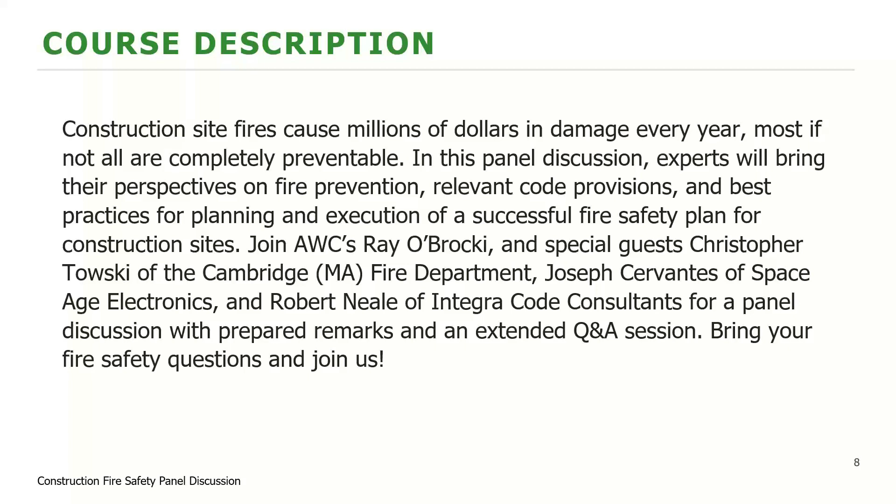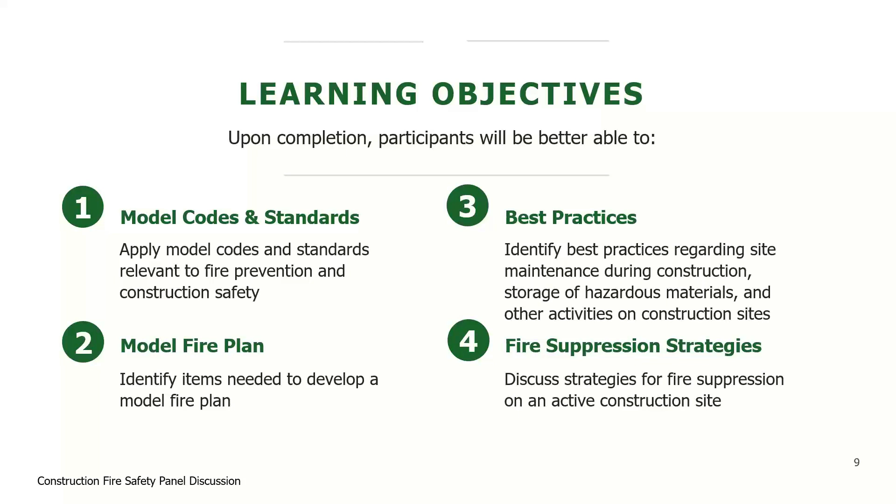Let's go over learning objectives before we get into introductions. We're going to talk about some model codes and standards relevant to fire prevention and construction fire safety. We're going to talk about a model fire plan, which is required for construction sites. We're going to identify some best practices regarding site maintenance during construction, storage of hazardous materials and other activities on construction sites. And then we're going to discuss strategies for fire suppression on active sites.

Okay, so that's me. Before I became the manager of fire service relations with the American Wood Council, I did 23 years in the Baltimore City Fire Department. I was the fire marshal, fire official. And then I retired and became the chief building official for a little city outside of DC named Rockville, Maryland. It's where the Consumer Product Safety Commission is housed, among other things.

Now I am the manager of fire service relations for the American Wood Council and the administrator of the Construction Fire Safety Coalition. All the panelists today are members of the Construction Fire Safety Coalition. If you're interested, we have a lot of resources on our website, which is constructionfiresafety.org. You just Google construction fire safety, and that'll be one of your first things to come up.

So let me introduce our panelists today. First up will be Chris Towski. He's a fire lieutenant for the city of Cambridge, Massachusetts, with over 24 years of service. He spent over 12 years with the Fire Prevention Office, where the primary duties were to enforce state laws and codes related to fire prevention and protection.

I think what makes Chris particularly qualified for this panel discussion is he's a master electrician. He's a licensed electrician and construction supervisor in Massachusetts. He has been his department's electrical safety officer for almost 12 years. I think that's important because if you look at the Campbell report that came out in February 2020, while electrical wasn't the number one cause of fires, that and arson amounted to the biggest fire losses. 75% of all the fire losses were in fires that started either with electrical or with arson. He's been the department's electrical safety officer for 12 years, and he instructs on various electrical safety topics.

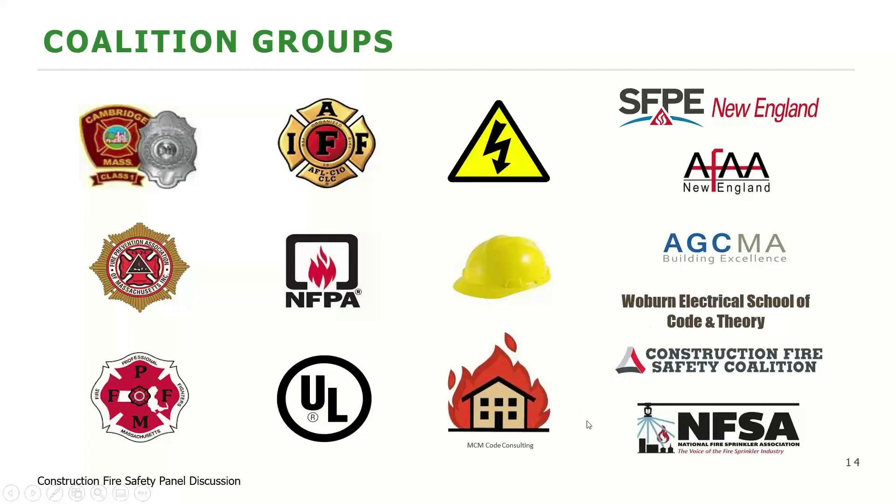You saw the big laundry list that I had. I put a lot of time and effort into trying to master what I do out there, and this is one of the arenas that is very personal to me.

And with construction fire safety, the reason is what you see here with that hard hat is I come from a construction background. Prior to me getting into the fire service, I had 10 years doing things like banging nails, and then I got more specific into the electrical trade. And then I brought that with me here in the fire service.

And with my promotion, it allowed me to do some things with all my tenure in the fire prevention regulatory side of it. It allowed me to really focus in on this.

As Ray had mentioned, I'm affiliated with the NFPA. I sit on many committees, with 241 being one of my strongest. When I first got in that committee under the NFPA requirements, I was under the enforcer, but now I'm representing the International Association of Firefighters, that's labor-based. So I'm representing labor, but there's still a big portion representing the enforcers because the enforcers out there are doing the labor. And as Ray mentioned, I'm the current president of the Fire Prevention Association of Massachusetts.

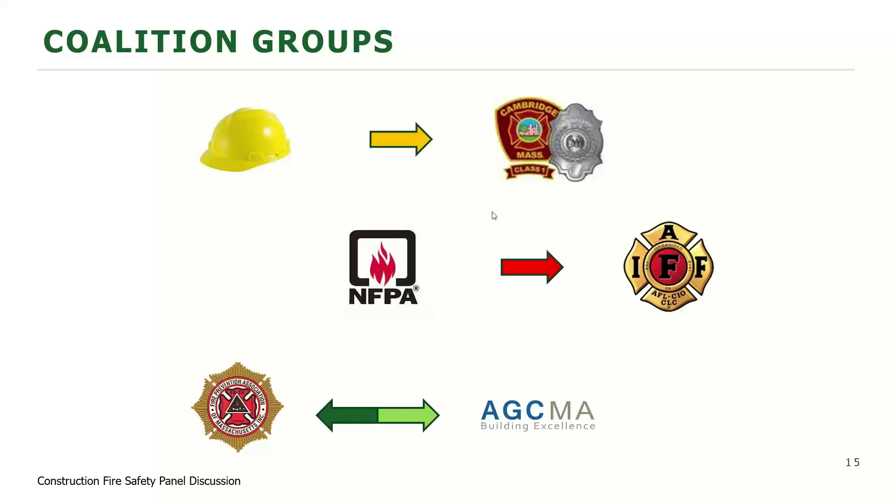What we did several years ago here in Massachusetts is we made a marriage. Essentially, we became a member of the Associated General Contractors of Massachusetts because they're a big organization, and we took them on as a member of us. That's where we can really bridge the gaps, if you will. We've had very good success over the last 6 years here in Mass with what we've done with partnerships throughout the Commonwealth and spreading the word.

Typically, when I do this presentation, I throw this out to everybody. From the polling question, there's quite a few folks here, whether you're an AHJ out there, a building or fire official, or if you're a contractor in that realm, or a consultant - I saw there was a good portion. So everybody is going to get something out of this, no matter where you sit. But the bottom line is it doesn't matter what your role is - you have to be involved and you have to have some layer of responsibility to it.

So again, high level here, just showing you the United States problem, if you will. It's estimated that there's just right around 8,600 construction site fires here in the United States. Granted, a lot of them are on the smaller scale - we obviously see the things that hit the news lines. I do my own personal tracking daily, and I'll show you what I hit on. But the bottom line is it costs a whole lot of money, and it injures a whole bunch of people. The averages out to be about 23, 24 a day out there.

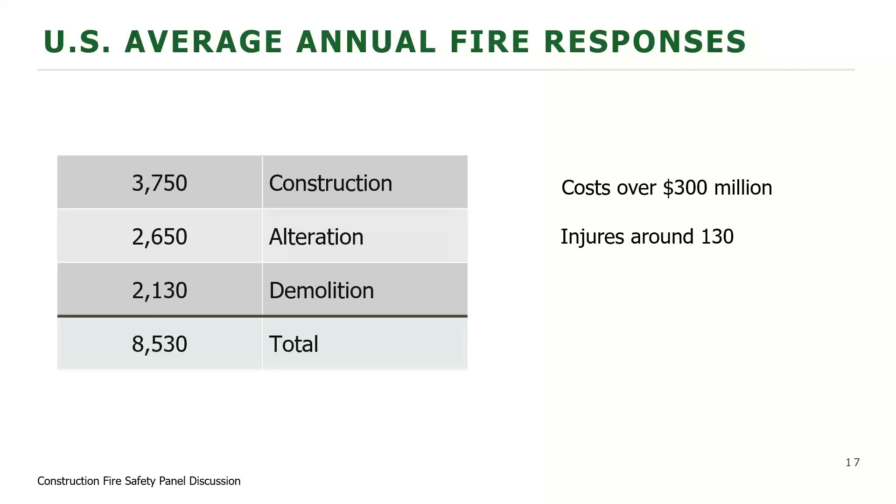What I see more of is that we're about on track for every 3 to 7 days - sometimes we'll have a wide stint, we might go 10 days - where we're seeing something that hits the news lines. Unfortunately, what happens is we get a lot of shadowing. What I mean by that is we get our seasons where we have a lot of wildfires, so trying to do a search on fire, a lot of things get focused and the focal point all goes to the wildfires, and whatever might be taking place construction-wise gets a backseat if it's showing up at all. But what you're seeing here is the tracking I've been doing over the last 5 years. We're the 14th day into the new year, and we already had our first one in Las Vegas just a few days ago.

But what I want to bring to your attention, without boring you too much, is look at last year alone - last year, we had 89 construction site fires. I actually think this might be off a little bit, but we'll leave it at that number for the time being. So we encroached pretty much where we were for 2018 - I actually think we exceeded it. But you can see we had more fatalities, and this is going global too, not just the United States - this is going worldwide. And we've had a bunch of injuries.

What's key here, especially here in the United States, we had several months of closing down of construction sites. Even with that closing down period, we were still able to maintain those numbers high. So we got to really look at this holistically and say we have a problem. Granted, construction site fires are small on the whole fires problem out there, but it's still a problem, and the problem's growing. So we really have to put more focal point into it. Joseph's going to go over the causes and stuff that are more popular out there.

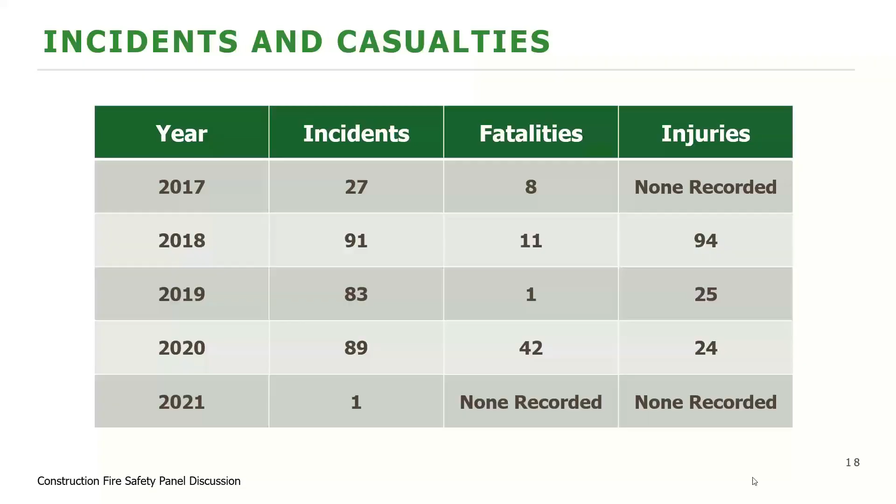But wood is not the enemy, and I know this is specific for the Wood Council, so I'm sure they like the feather in the cap there, but we got to really look at this. Wood's not the enemy, it's just something that we have to live with, something we construct that we use. And if we look at the reality side of it, wood is needed because it keeps us in a much greener place with what we got going on in our environment out there.

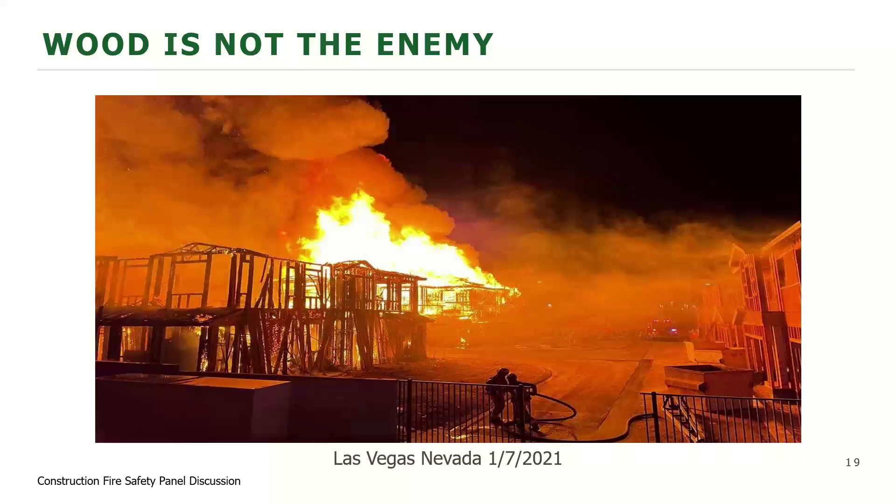So, like I was saying, we live in a world where things burn. It's our job to figure out what we're going to do to break the fire triangle. When we look at the fire triangle, the theory is real simple. There's 3 elements: we have the oxygen piece, we have the heat source, and we have something that's going to burn. We can't control the oxygen part, but we can do a much better job separating out the heat sources and the fuel. It all comes down to housekeeping and management.

So we kind of have 2 parts of what we really need to involve with fire safety. Yeah, we all want to look at this, prevent fires from starting in the first place. That goes a long way, but some of it we can't do. I know myself, I'm in the Northeast here, 4 to 5 months out of the year we're dependent on heat to stay warm and to keep things drying timely for the construction piece to it.

So it's nice to be able to have the magic wand to wave and say, let's put all our enforcers out in the streets, and we're going to cite people or whatever the action is going to take, we're going to stop this altogether. But the reality is that there's still going to be some underlying things in our world that make up what happens. And the bottom line is any fires that start, we just have to get involved with how to keep them from getting bigger. Whether it's earlier detection, earlier notification, changing our mindset of products, our scheduling, whatever the case is. And even our interactions, training our workforce out there how to recognize things and not just hang fire extinguishers on the wall, but give them the training and the things they need so they know how to use them. So how do we go about doing that?

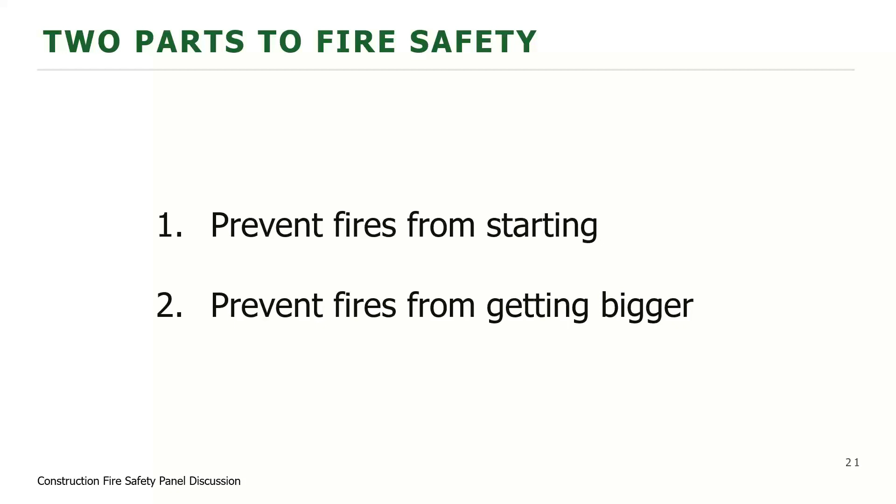This is what this is all about, this is our NFPA 241. This is the most current edition, the 2019. We're in the process of working on the 2022. We went from a 5 and a 6 year cycle, we're getting into the 3 year cycle. That's how the NFPA wants to do just about all their documents, which isn't a bad thing because it's able to be more blended into if folks are using NFPA 1 like we do up here in Massachusetts, that's on a 3 year cycle and what have you. So it seems to get into a place where it'll flow better, so the most current edition can be adopted into that cycling swing.

In Massachusetts, we're a cycle behind. We're using 2013 currently. We actually have a little conflict even within our own codes up here. We run a building code and a fire code, and both, our building code actually references the 2009 edition of 241, where the fire code references 2013. But nonetheless, the way we worked it out up here through our statewide fire partnership is the fire side wins, if you want to call it that, and the 2013 is the one to follow.

So we got four pretty essential steps here. Finding the code. Now, seeing most of the people out here, the big majority were the consultants and the AHJs, we know about that, so finding the codes isn't a problem for us, but it's going to be our job to make sure the rest of the world out there is able to find the code.

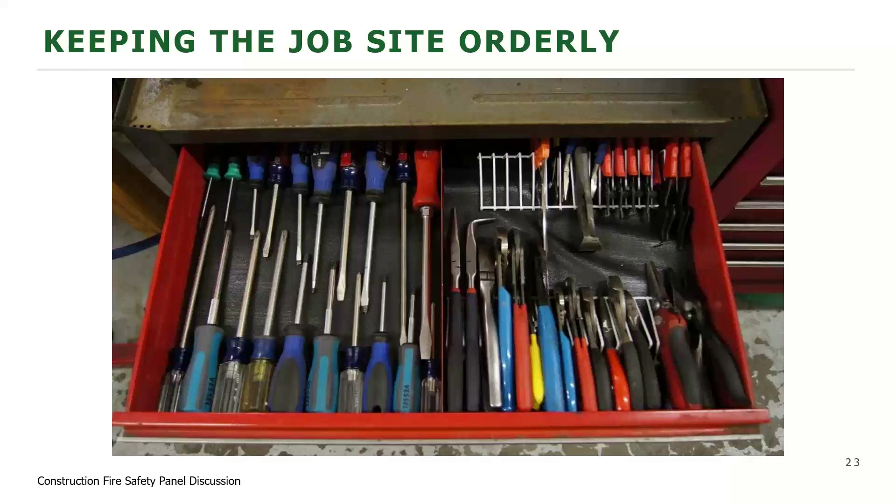Marcy put in a nice little flavor here in the heading. I had it worded a little bit differently, but I like what she put here, because it goes hand in hand. My view was this is what code is for the folks that are the AHJs and the consultants. And if you're in the code development process or the code writing piece, you get this. This is what code is intended to do. It's supposed to be nice, neat, and organized. And like Marcy put out there, just like the job site, it's intended to be nice, neat, and organized.

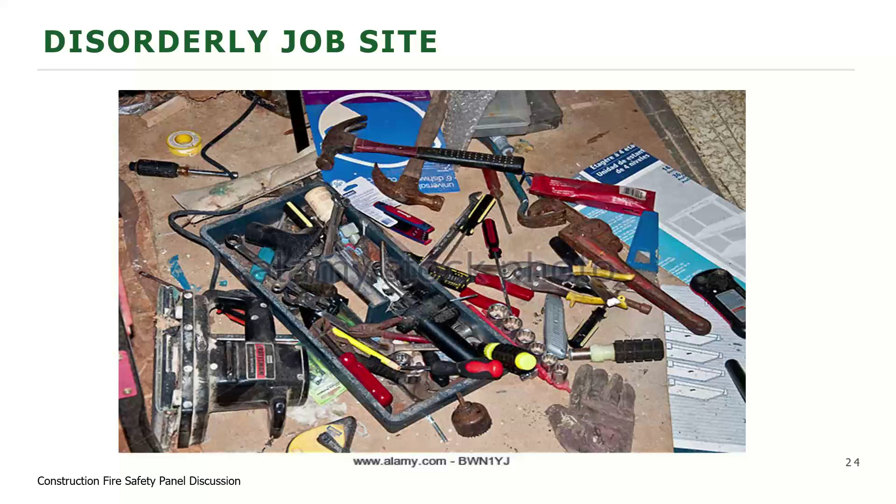Advance, please. So who does the code apply to? This is the key. When you get into NFPA 241, the current edition, which is kind of funky—I'll get into where we're going with the next edition at the end of this—it's kind of funky. You've got to go to the middle of the document to even figure out who it applies to.

But the street name is, it's an owner's document. Just like most things that get built, the owner is always on the hook for things. But this here, it's the owner's document, plain and simple. The owner has some rights, obligation, whatever you want to call it, where they can delegate out that authority.

And that happens pretty widespread, especially since I'm in an urban area outside of the Boston area. So the bulk of the construction, outside of the mom and pop shops doing single family or flipping of property, that stuff—but the ones taking the ground-ups and the high rises and the multifaceted, multi-tenant, multi-use groups and the real complicated pieces, these things are all getting delegated out, as you know.

And typically they'll fall into the platter of the construction manager, which is under the umbrella of the general contractor. There is a big swing though, because even contractors are realizing this might not be an arena they could have a whole lot of input in for developing. They can hopefully implement it, but the development piece, so they'll shift that off to a consulting firm.

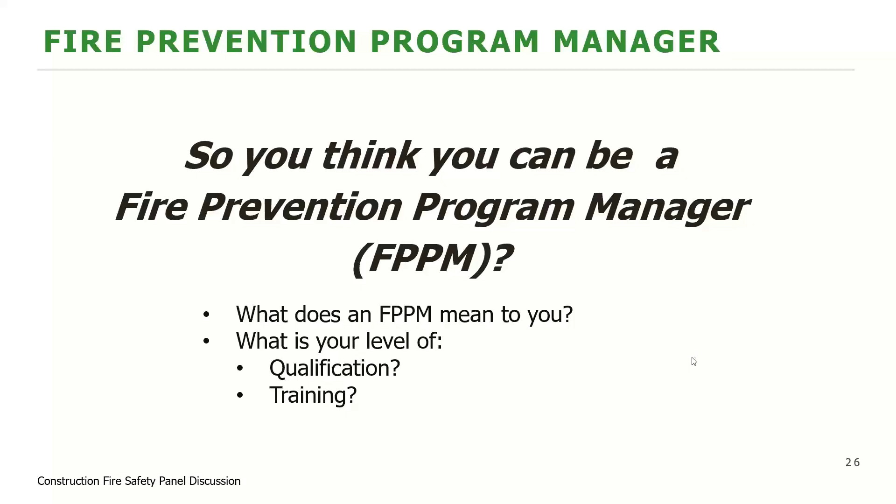Advance, please. Thank you. All right, so I try to break it down, and again, I'm trying to keep this light, if you will.

You have to recognize and pay attention to those needs for prevention. And again, prevention could have two meanings: preventing fires from happening from the beginning, or preventing them from getting bigger. So you have to know where you sit with that.

You have to be part of the program. I knew I'd get a chuckle out of somebody somewhere. But you have to be part of the program.

Get involved. Yes, plans are being sent to you and you've read them. But if you're in that development process of developing that program, you'll comprehend it much more, and it'll be a much easier rollout when you have what we call in the fire service the tailgate talks, or what happens in construction - your morning safety chats or whatever it is - and you can roll it out that much more streamlined. And you have to be a boss.

I get it, especially - I'm imagining it's like this all over the country and the world - but here in the Northeast, we're having a construction personnel shortage. Most people that are educating themselves aren't getting into the construction piece. The numbers are much smaller. We're having difficulty filling the specialty trades like electricians and plumbers, but there's still a lot of folks in there - the numbers just aren't as high as we'd like, especially with the amount of work going on.

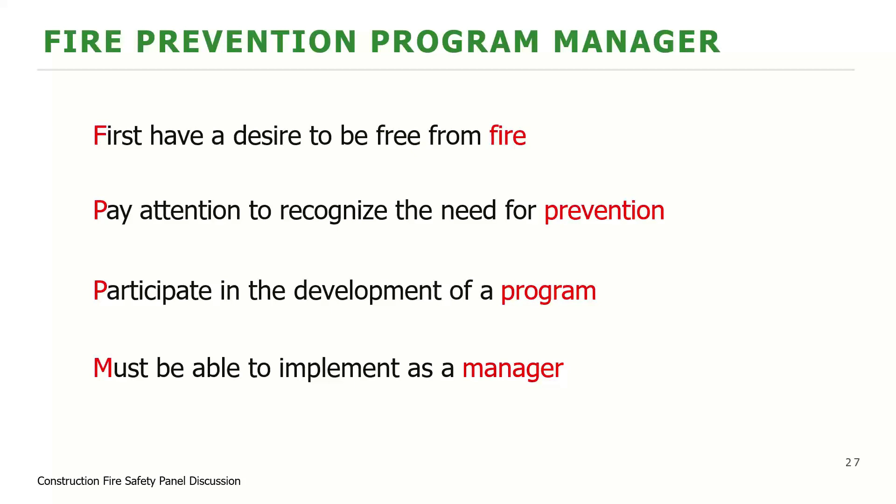Advance, please. All right, the plan - again, as I mentioned, Mr. Neal is going to give you a wonderful presentation and touch on planning and stuff. But again, another play on words.

This here I left in for myself - we're at a point, especially up here with our 6th year of really implementing that in the Northeast, and certainly out of the Boston area, and through my own eyes, the fire service view - we're being handed multi-pages of plans, which is great.

That all needs to be submitted, maybe as part of the building permit process, the way we walk that dog up this way. But as far as knowing what it transpires into from the enforcer side, I know what the words mean, I know what 241 means, I know what that section means.

What I'm looking for now is the punchline, the 1-2 page high level timeline. I'm not looking for every day what's going to happen. I'm looking for significant changes, what's going to happen.

If we can put it together and lay it out in a nice chronological order, I'm finding, me personally, that the spreadsheet format is working. It can pull things out in color coding across different time periods and activities, where personnel are going to be and what the activity is going to be. You can hone in on where your hot work processes are or where your heat sources are. So there's many ways to do that.

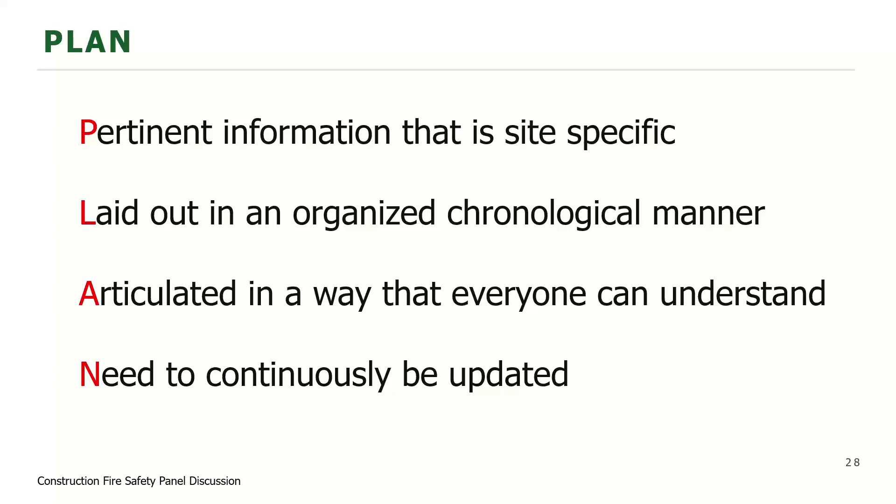So implementation all points back to that. It has to be flexible, modular, and expandable.

This is probably the most difficult part, and good luck to Rob on this, on how he's able to portray words on a paper that have life, because it is a living document. Just like that analogy I just gave of the baby, from the time it's born to the time it's an adult, of all the things it has to go through.

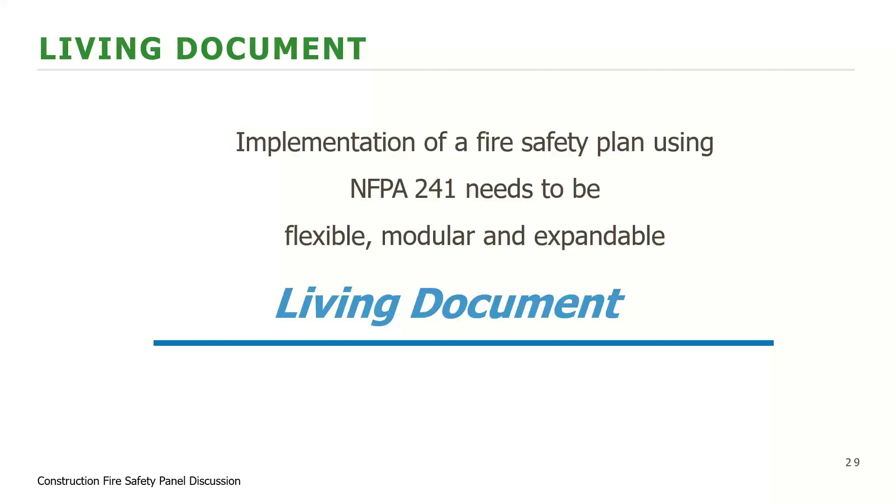All right, so fire service enforcement. Let's see now, we'll start poking the ribs of some of our enforcers out there, especially if you're on the fire service side.

241 makes it kind of very clear. The only thing that should be asked of the fire service is just consulting. In other words, just to get an insight, a bird's eye view, if you will, of how that fire service must operate, to see what their specific needs might be.

I'm starting to spread the message now, as we grow together up here in the Boston area. I'm asking these ownerships, developers and contractors now, how many of you have ever gone to your local fire service and said, hey, if I'm going to build something, let's say it's all wood construction, and I'm out in this remote area, do you really have enough resources? Do you have enough water supply to mitigate, to do anything, should there be a fire?

No one's asking those questions. We're still in the infantile baby step role where, hey, I'm just glad people are starting to get some plans out there, because at least now they're starting to pay attention to this. But we still got a long way to go, so that as we domino this, as we spread this, we'll get folks in tune on walking in the fire service shoes, so they'll get a good side of that. And that's how we do that on the fire service side, we're making our expectations known.

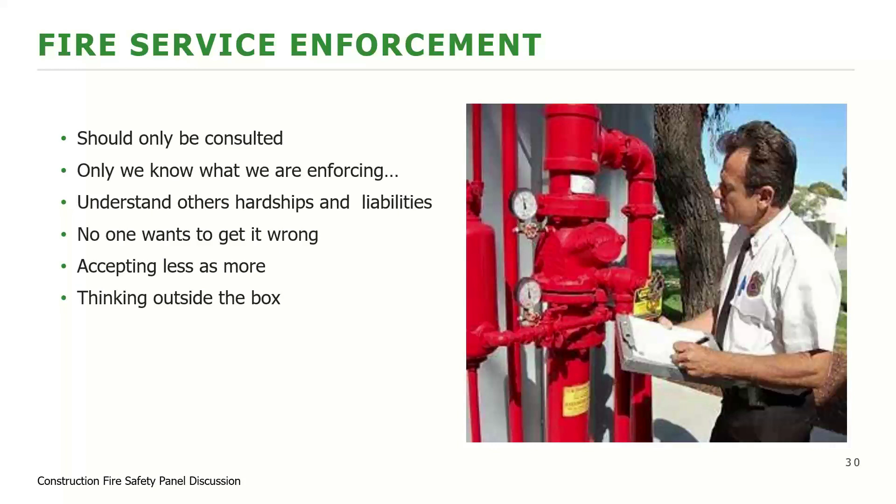So with that, the next edition piece—we're into this huge reorganization of it. We've moved some chapters around, took some things that were in two different places and combined them. We really cleared it up. We defined what FPPM means, and we spent a lot of time on sprinklers.

I won't bore you, but you can look at what we've done through the tier review with the NFPA for the next edition, or you can wait till the 2022 comes out. We've added a chapter for large wood, which is key for why we're having this discussion today, and we put a lot of emphasis onto the program, especially with the sprinklers.

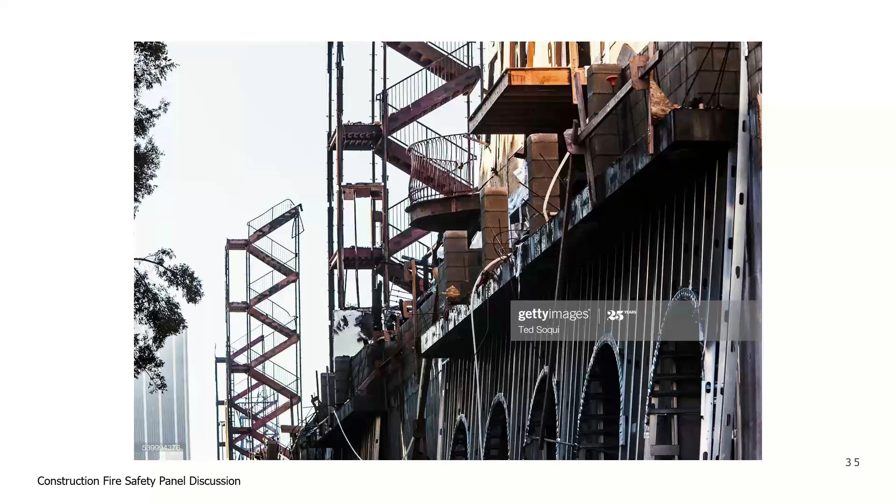This is an image of the Da Vinci apartments in downtown Los Angeles. This happened in 2014—that's the outer shell left after a massive collapse right in the heart of downtown LA. So why are fire risks increased on construction sites, and what standard can we use to help move forward?

The standard for safeguarding construction, alterations, and demolition—NFPA 241—as Lieutenant Towski hit on. NFPA 241 has a technical committee, and that committee went through and did a review of the annual averages of fires that had happened between the years 2013 and 2017.

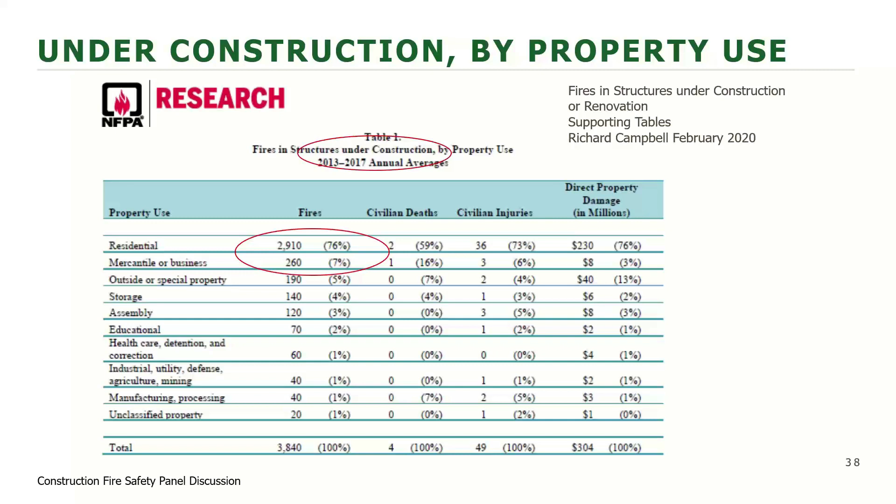In that report, they showed that residential fires were the superseding leading cause in construction fires for projects under construction, at 2,910 incidents. They broke down those incidents, and this is where we get into specific fire protection. If we're talking to NFSA or to contractors, they're asking, well, where are the areas in a building I have to focus on? What I really wanted to point out here is the element of what causes these situations.

Cooking equipment, electrical distribution and lighting equipment, heating equipment, and then intentionally set fires—those are the most precedent causes. And then everything below that, you can see where we have regulation in place: hot work, fire watch after hot work, spontaneous combustion. Those levels are so much lower because there is so much regulation and oversight on them. But look at all of the human element.

It fits in kind of nicely with what Lieutenant Towski had mentioned, which is the human introduction of accelerants, cooking equipment. They're still cooking on construction sites. There's still issues with electrical distribution, temporary lighting. We got these massive panels going in, temp lighting panels. There's no protection. These are structures standing for 2+ years without water protection. And that's a serious issue, especially when we're talking type 3, 4, and 5 construction.

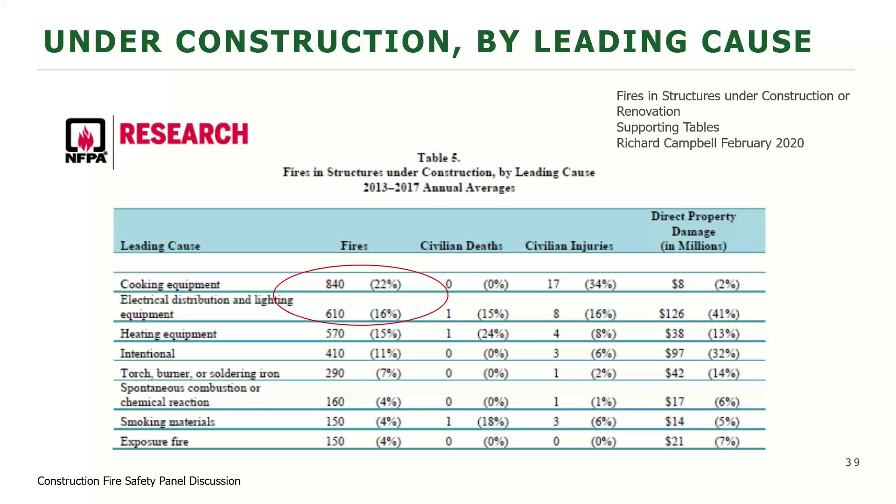So we can really focus and harness our attention on these specific locations to make sure that when we're putting fire protection methods in place, we can allocate it to the right area to slow down the progression of the fire. We may not be able to stop them, but we can slow them down a little bit with water or proactive alerting detection. So we can move forward.

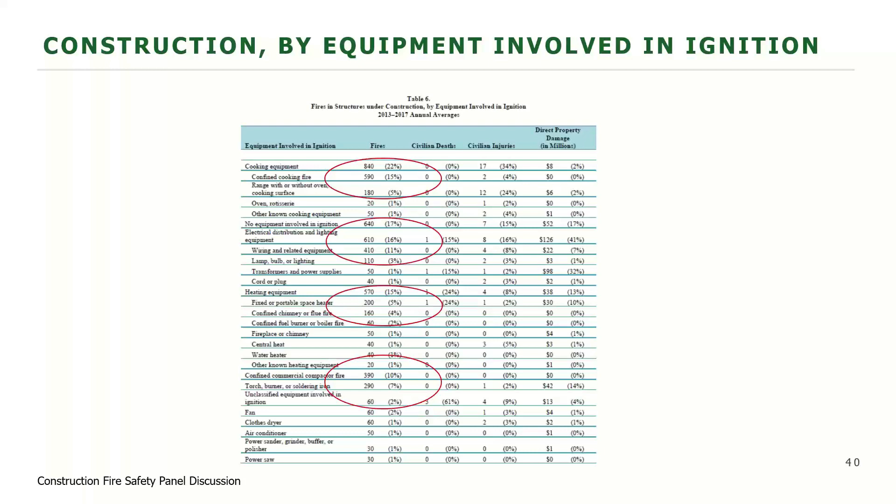The elements are broken down even further as you continue into the report. I ask you, code officials, everybody on this call, please look for NFPA 241, the report that came out. This was in February, and it's just a great report to look at, really isolating where these locations are.

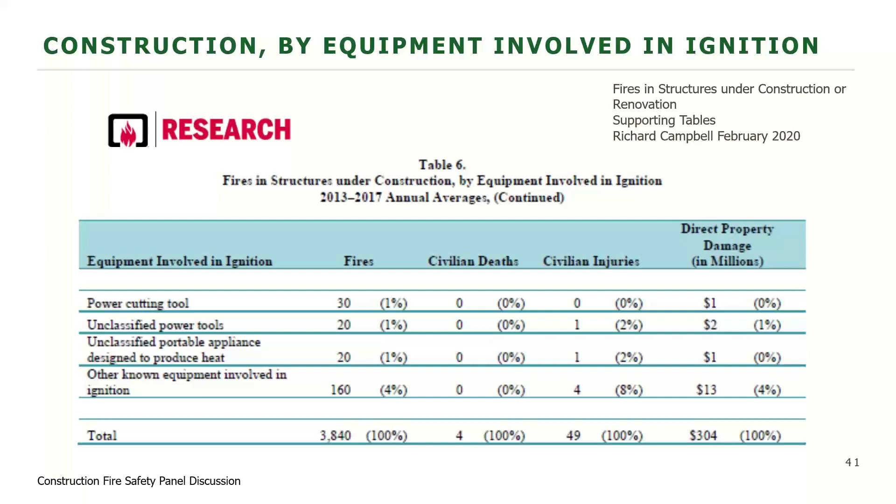You can move forward. Again, it continues to go down into the human element of power cutting tools and the different things that are starting the fires on the lower end. But you can see the averages there of just new construction, with 3,840 fires per year as an average over those 5 years.

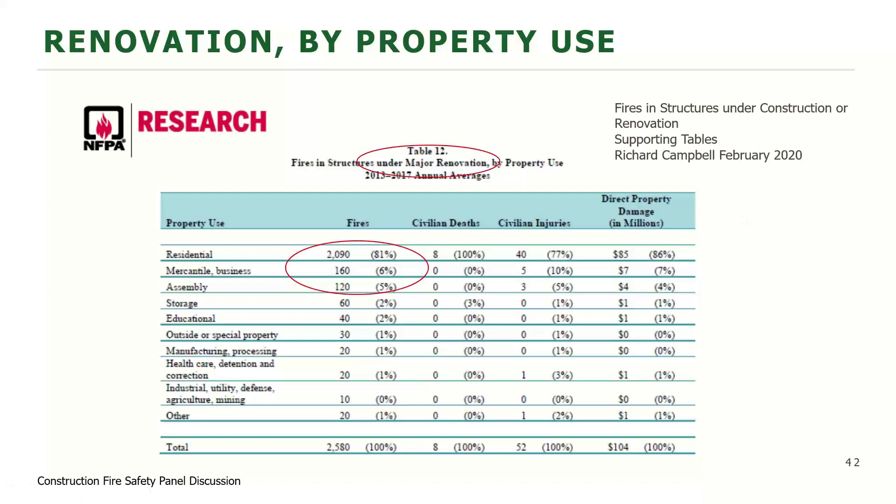Go forward. In major renovations, the leading cause in those was residential as well. I mean, that's a really big number. What does that tell you now? We have to dig into that.

The causes change. Now we're using existing infrastructure, existing house panels or existing lighting panels or what have you to power the construction area, or maybe we're demoing certain areas and they're not safed off properly. But you can see again, it's the electrical distribution, it's the existing systems in the building, the heating equipment. People are trying to stay warm in a non-tenable space. As Lieutenant Towski mentioned, on the East Coast you deal with that every day. It's cold and you've got to stay warm, and there's accidents that happen.

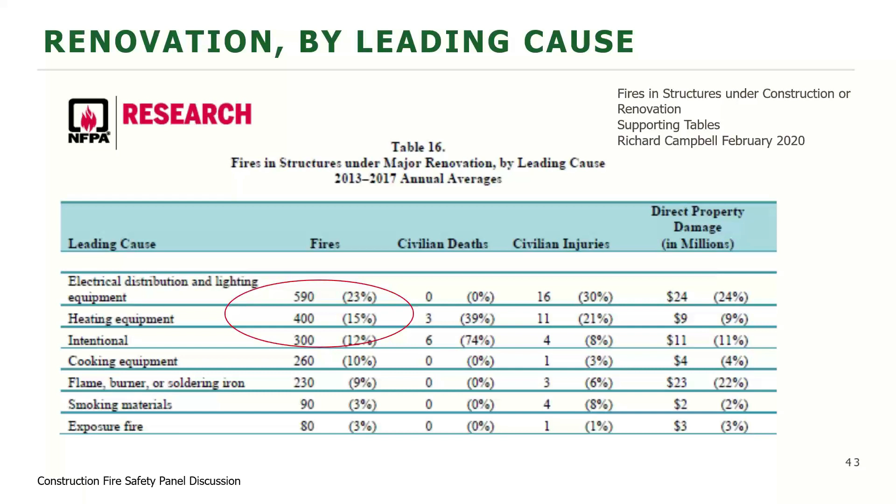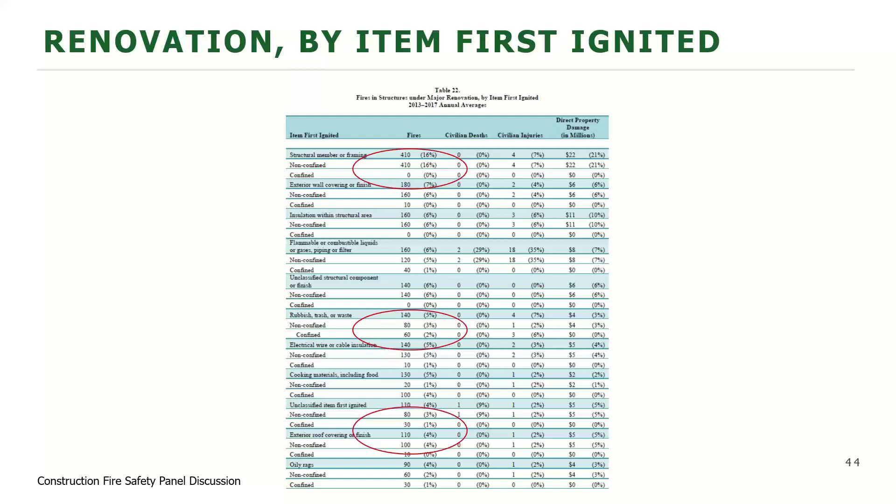And then the intentionally set fires rounds it out. But you can see again, it's a very big distribution from the human element. And then it gets even further down into where those are happening when we're talking about structural members, or the rubbish and trash waste. I'll point out an instance here in Virginia that happened recently where a fire chief said it was a trash chute that actually started the incident. And again, it's combustible material accumulation.

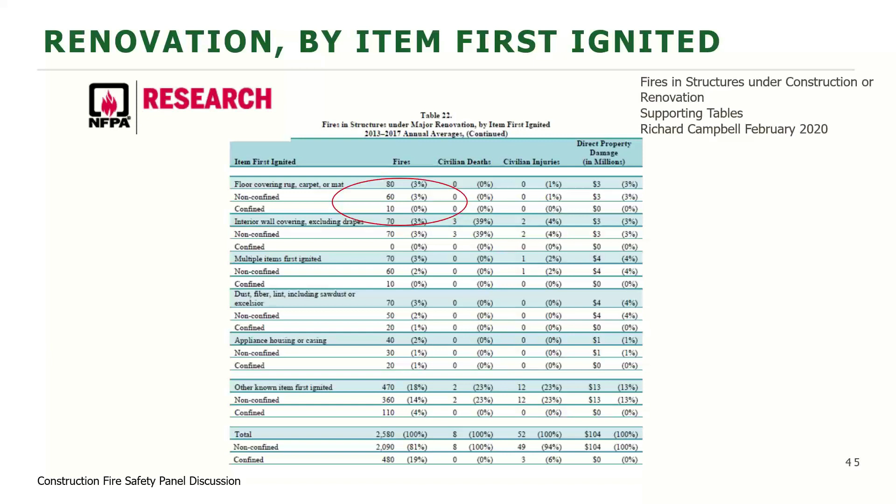So we talk the three-legged stool of firefighting: it's fire department access, water supply, and early notification. And so as far as firefighter access, fire department access, I'm going to hit on a couple of slides of that.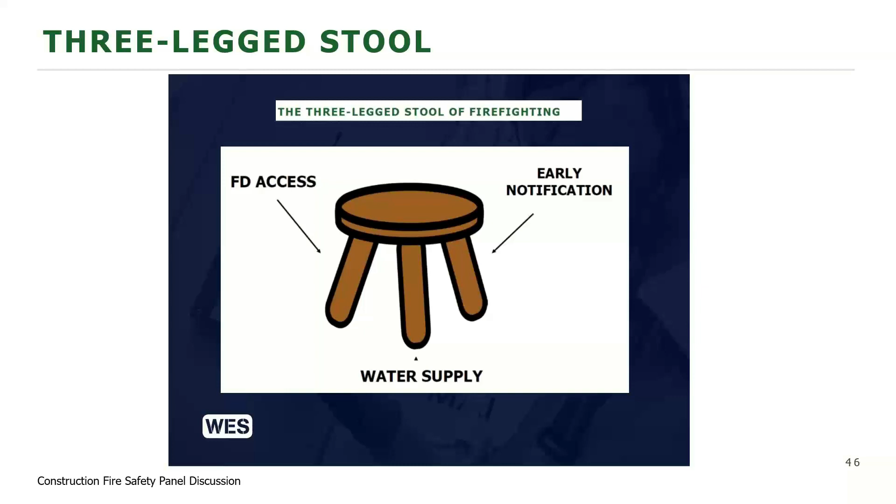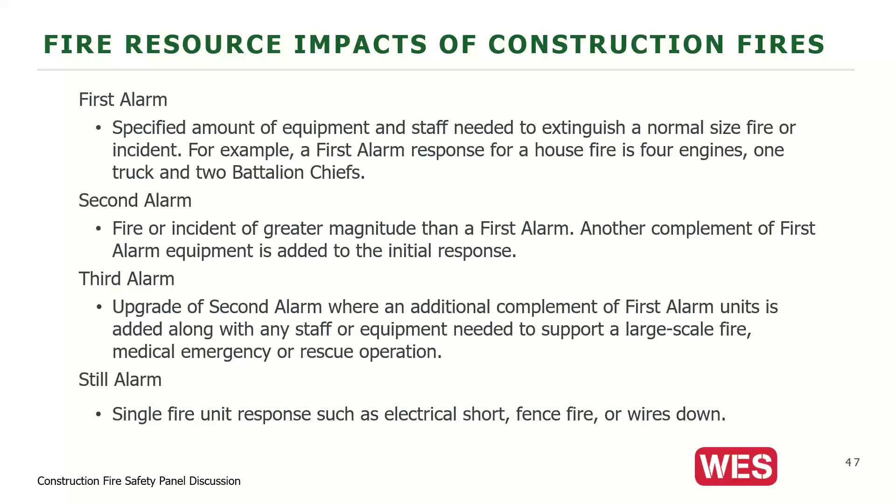Move forward. So the resource impacts on construction fires, and I'm preaching to the choir here: first alarm, second alarm, third alarm. For those of you that don't understand the resource loads this places on the strain, think of your local communities. You have a local firehouse that can report to anything in a certain area, and if the situation's a little more than they're capable of, they call in additional resources, backup. And you see it on TV shows today, call in for backup.

Well, when you start getting these major construction fires, you start moving the escalation up to where it's fifth alarm, sixth alarm, seventh alarm, outside of this scale that I was able to show you here that I found in the public domain. And look at the amount of equipment and resources that this takes: 6 battalion chiefs, rescue squad, division chiefs. This is the impact on your local community.

Because I know where I live, I go out on the streets and I can see construction sites everywhere with wood frame construction. And if a situation happened like this in the middle of my city, the resource allocations this is going to put on Southern California are tremendous. And we have fires out here regularly, and I see our firefighters out there on the hillsides combating some of these wildfires that we're dealing with right now because of all the Santa Ana winds.

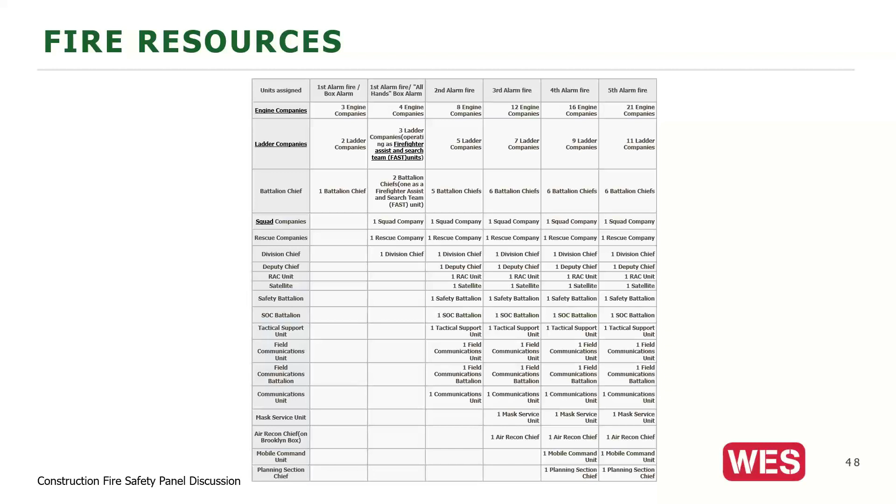So now you add the element of a situation like this with all of the different things that are happening socially out there with arsons and things that are coming at us. It creates situations like this.

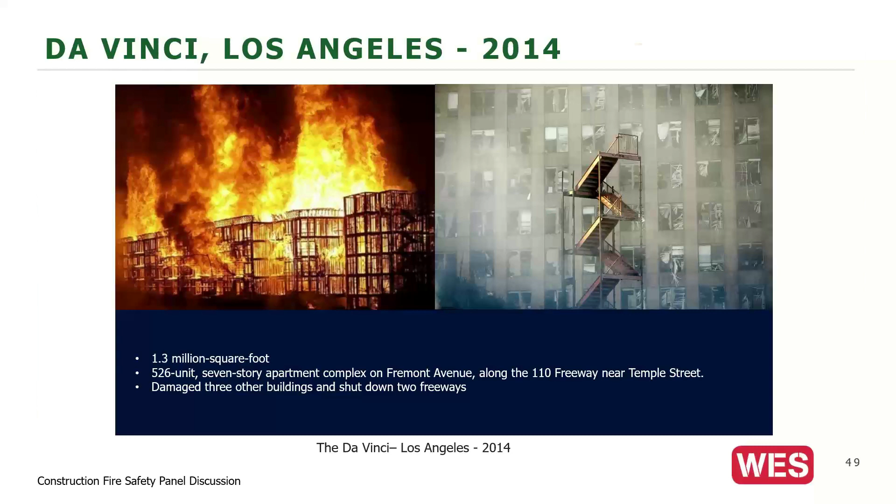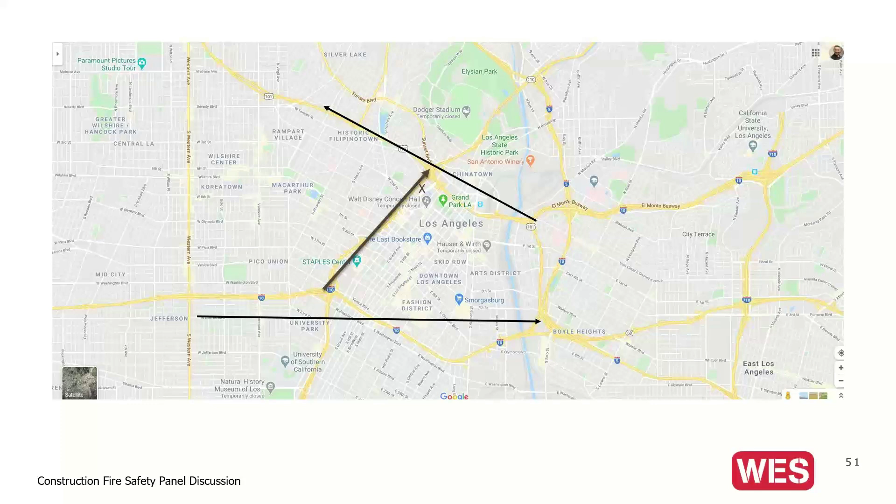This incident, because it happened in the middle of Los Angeles, if you understand the grid pattern of our freeway systems, in the center of that image right there where it says Los Angeles, that's downtown LA. And the way our freeways run, the 10 runs east and west, the 101 runs to the northwest, and then you have the 110 that intersects. The 110 gets you home right through downtown. This happened right there in the X. That is just adjacent to the heart of the city of Los Angeles.

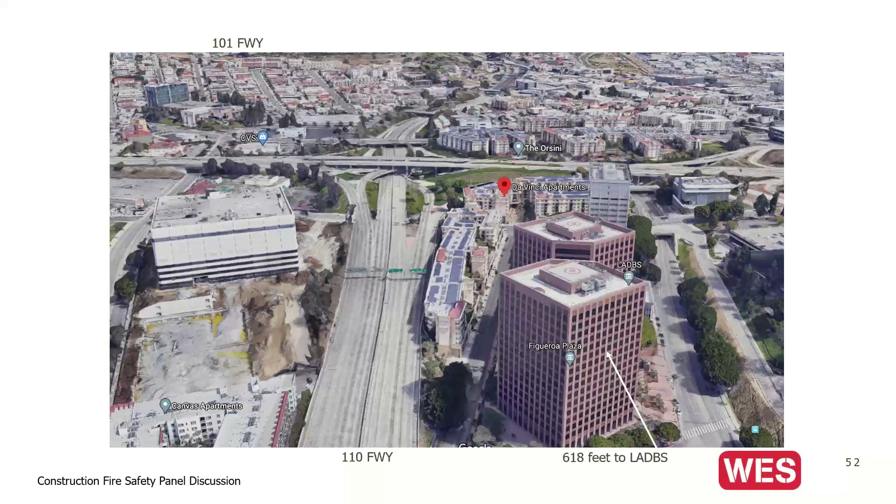There you can see the final image on Google Images. You can see how close the Department of Building and Safety was to this structure. There's the aftermath. It was a complete collapse.

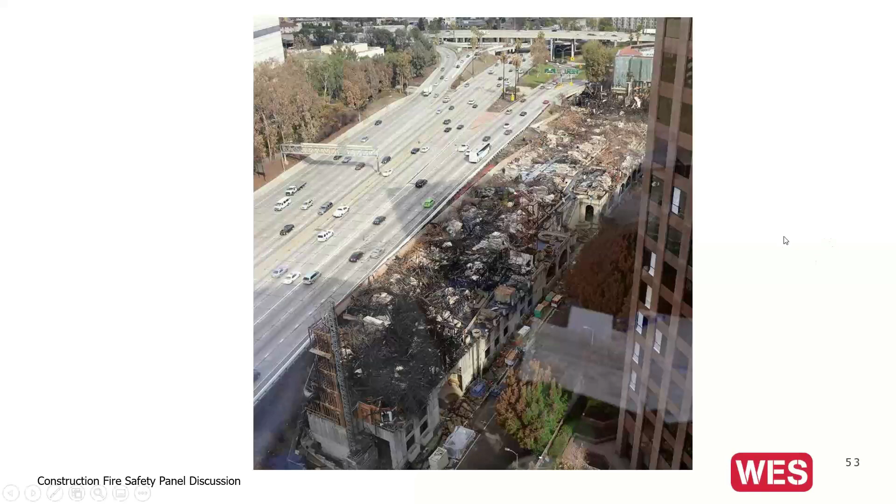There was an issue with fire department access. There's video available in public domain where you can see apparatus that had to be moved around regularly because they ran out of water and had a hard time getting that water source to the structure as it continued to burn. Remember, this is a full-size building.

I believe it was, as many stories as it was, had zero water protection in it. The fire load calculations, when we talk about ample water supply for a construction site, is based on, I believe now in the new code, 500 gallons per minute. But if you think about this, do a water calc load with a full-size sprinkler system with additional water storage on site, and now do that for a 7 story building that has zero water protection. We're running out of water, and that's a big issue.

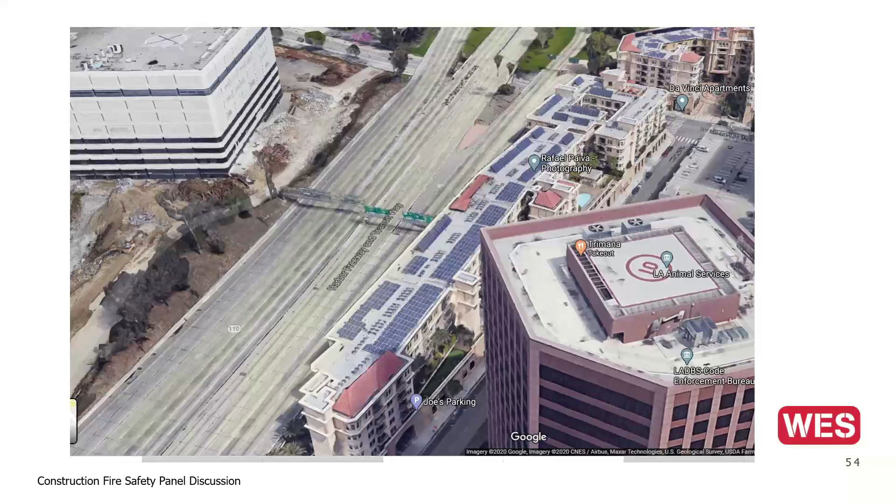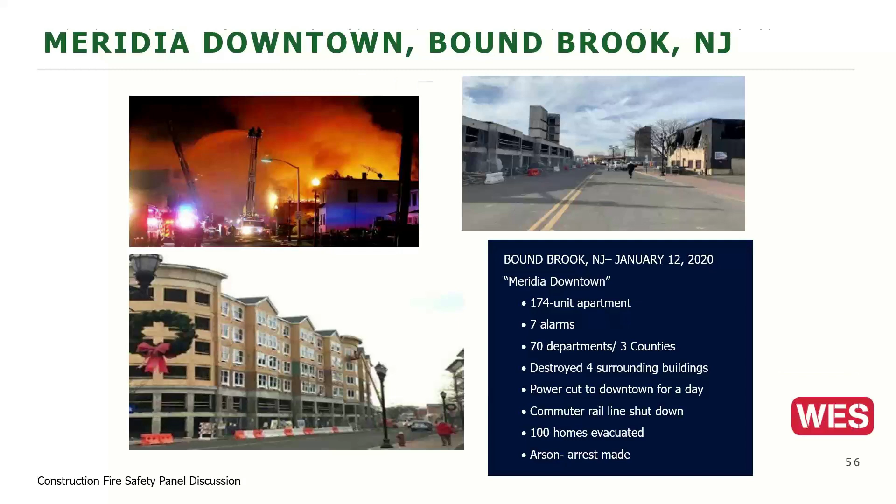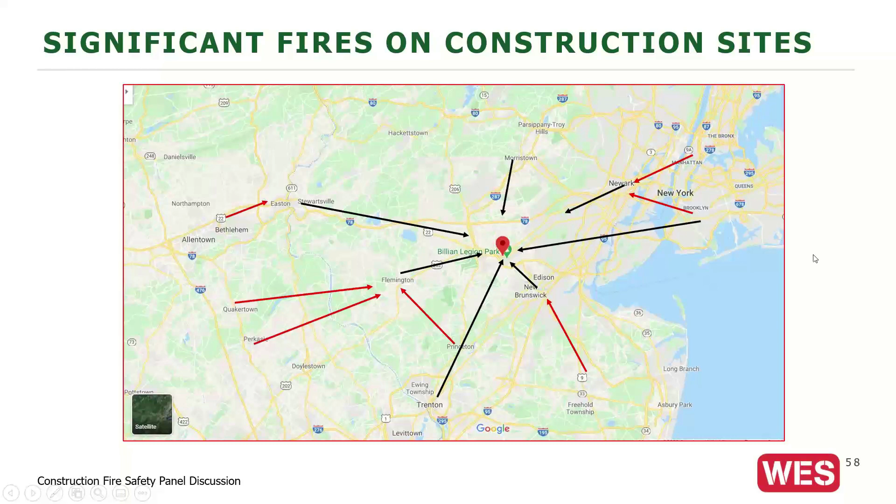So we have issues with access. This one obviously not, because we have the freeway, but there are some in the middle of downtown areas where you are going to have that access problem. 7 alarms, 70 departments, destroyed 4 surrounding buildings on this project. This project actually required more resources than I could put on that scale. The resource load that this had in the greater area, you can see how dramatic that was with them pulling all of the different apparatus in to support the situation as it was going.

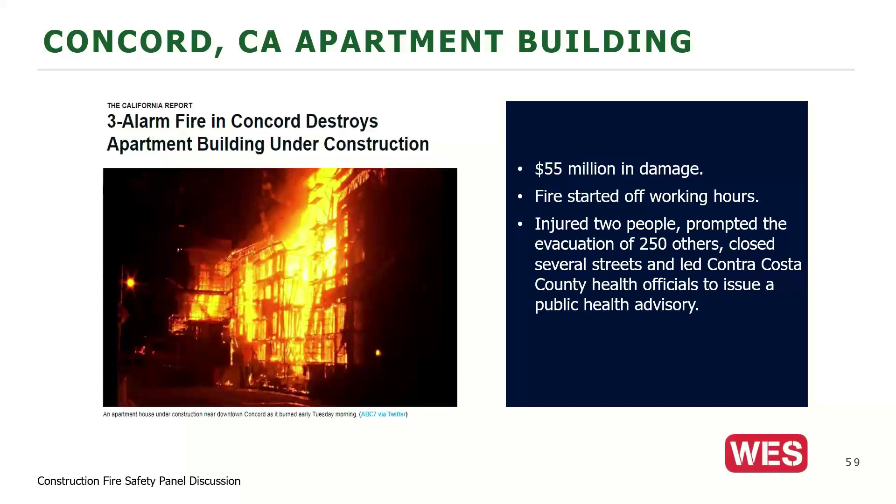This was in Concord, California. $55 million in damage. The individual was caught jumping the security fence. 59 seconds later, it was on fire. It was on the ground within a few hours.

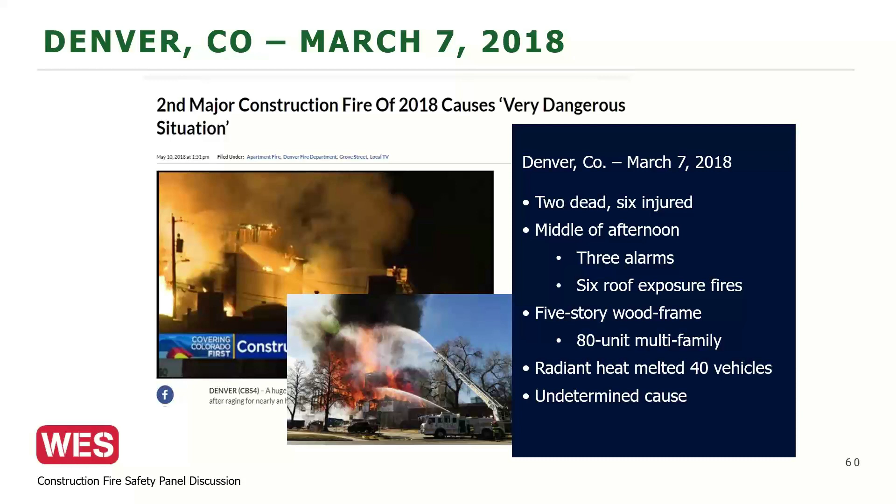This project was in Denver, 2 dead. It happened in the middle of the afternoon. The construction workers were seen jumping from floor to floor. The radiant heat was about 400 degrees, and it melted vehicles. I believe it was 200 feet away, the fire chief said.

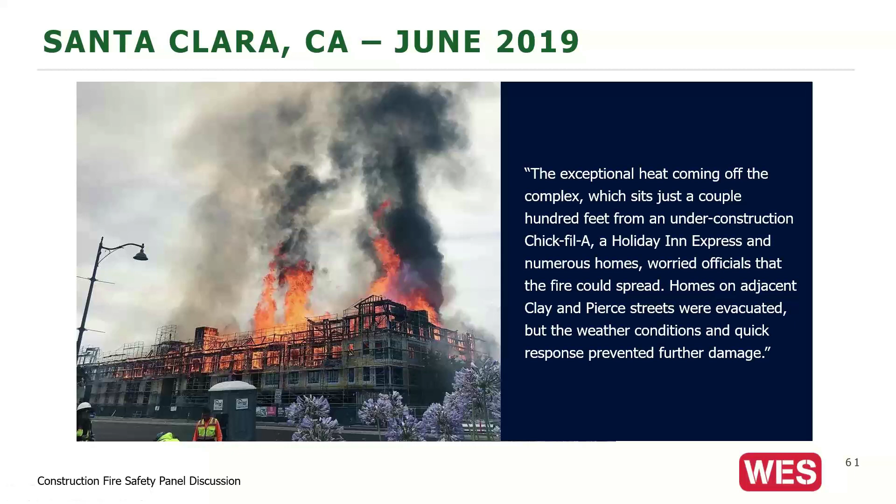This was in the middle of our backyards, right here in California. This was in a residential neighborhood, Chick-fil-A, Holiday Inn, numerous buildings right across the way. Spot fires were started. The embers were massive. And we're also seeing that the embers coming from these structure fires that are wood frame are about the size of grapefruits or bigger. So they're starting spot fires.

And there's one I didn't put in here, which happened in Everett, Washington. It started spot fires, damaged the railway, made the hillside unstable, and the building was a complete loss within about an hour and a half.

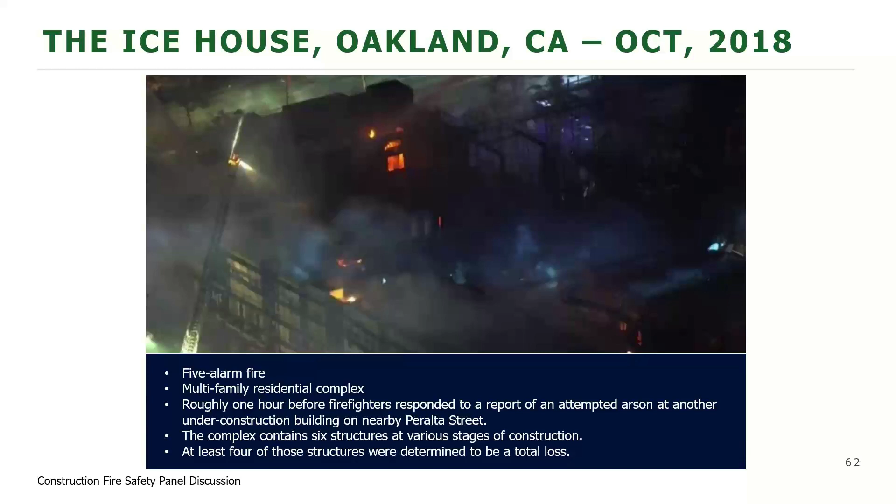This was a project in Oakland. 6 buildings, 4 of them were a complete loss. It was in the news.

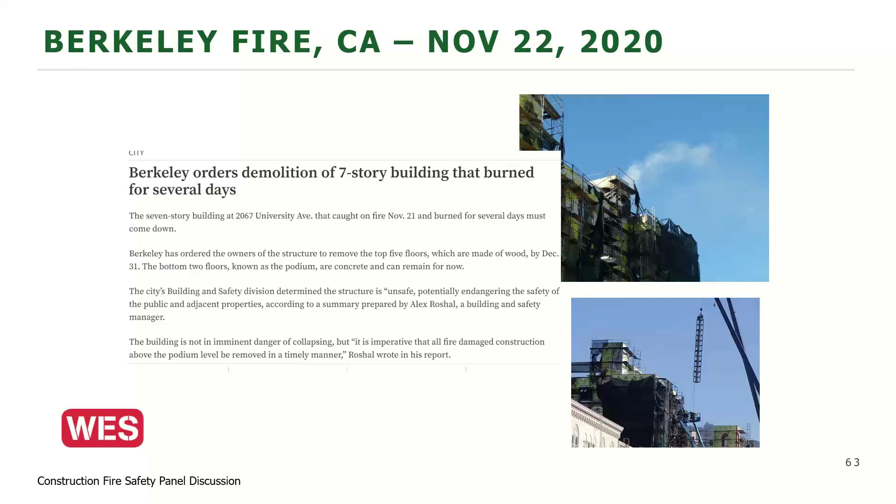So we talk about the social impact of construction fires. Obviously they're a small, disproportional amount of what's happening. As Lieutenant Towski said, there's 3 to 7 each day. We're looking at one every 10 days or so. Wood's not the enemy, but it does get a disproportional amount of media coverage because of where they're happening. It's in the middle of the cities where people are being awoken at 3 o'clock in the morning to a fire.

And all of these apparatus that are running in, and the radiant heat from this is happening in the downtown areas, and it's just causing a lot of destruction, a lot of displacement of humans. So social media, as you can understand, is going to be very negative. There's a lot of billboards and things on the outside of the contractors that can bring some negative connotation to them. The fire losses, again, it impacts people on a tremendous amount of levels, from lenders and developers, owners, insurance companies.

That project at Da Vinci, the developer was sued for not meeting the minimum requirements of Chapter 33 and NFPA 241/2013, which are the adopted and enforced codes in Los Angeles. And when I've talked to some of the jurisdictions, it's an educational thing. They don't even realize that it's something that they should be involved in. But it's trying to help continue that, to make sure that the documentation and stuff is provided, and that's going to be the thing going forward with the updates to Chapter 33.

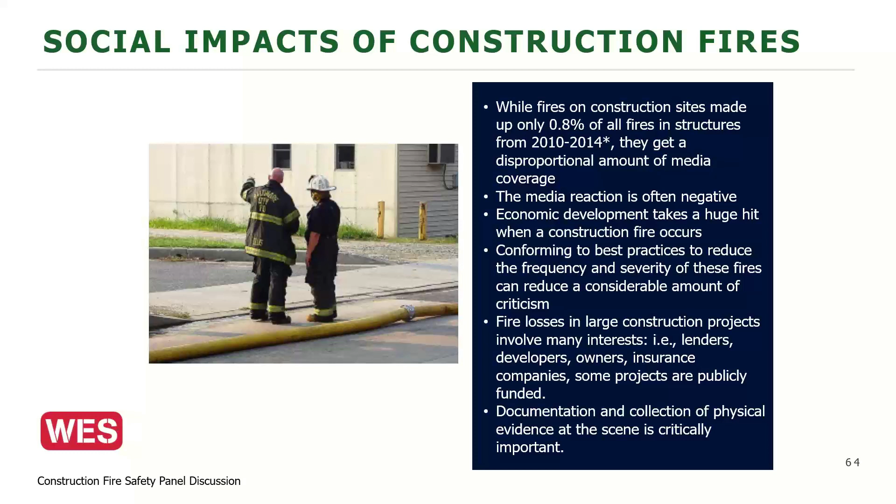So we can move forward, Marcy. Okay, so this was a project, again, social impacts. This was on Twitter. The Reno Fire Department actually posted this on their Twitter feed. This was a very interesting situation. Of the 21 buildings that are there, 14 of them were completely damaged or destroyed. The neighbors in the location there across the street started calling the police or the fire department because they heard

the buildings collapsing. By the time the fire department reported to the site and they were able to get all their lines out and their engines in and to get their hoses started on, they actually, I believe they were trying to be more defensive as they came in, because there were 7 or 8 of the structures that were already fully engulfed. They ran out of water. They had to pull in additional water resources from a different feed. So they ran out of water.

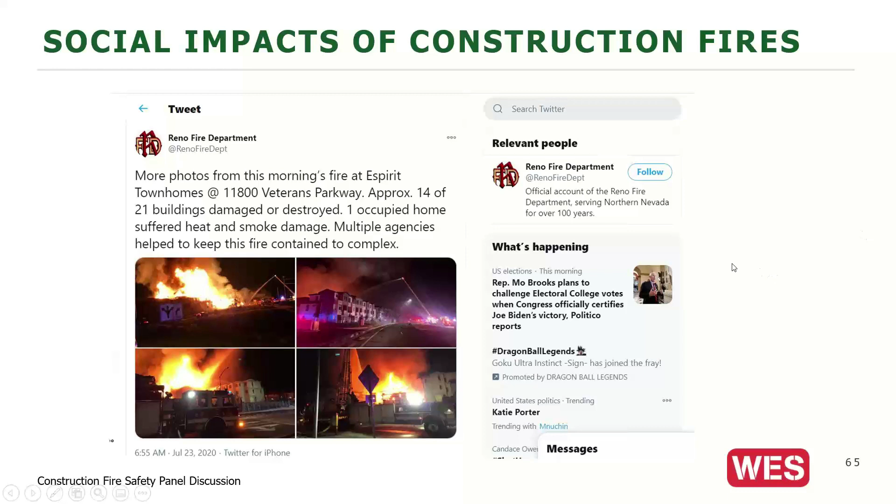And we talked about access issues, and now we're going to talk about water supply. And that's a big topic that was hit on in Chapter 33 when we on the FCAC work group went through with Mr. Obraki, and he's very familiar with that. Make sure you look at the next version of the IFC because there's a lot of changes going through.

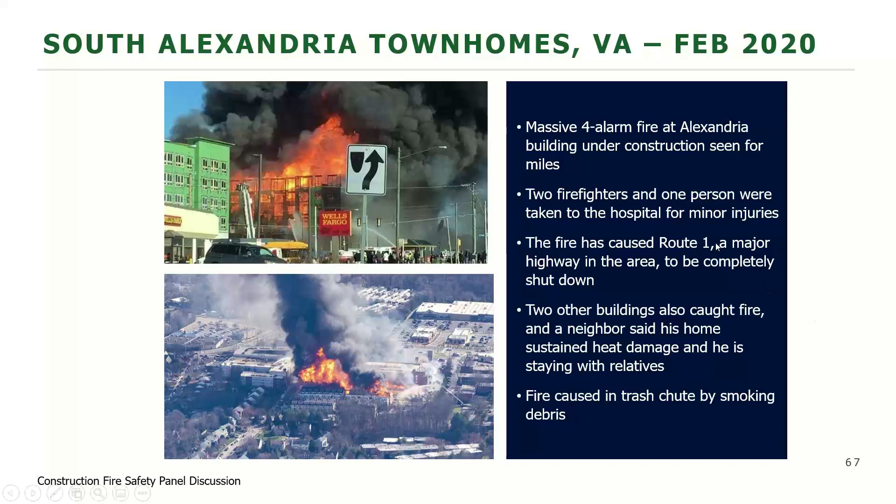And the last thing I'm going to hit on, this building here was a massive 4-alarm in Alexandria. The fire chief said that these pre-construction fire systems should be a mandate. The prevailing winds, one fire started the other building across the way on fire. It was pretty dramatic. And there's video available in the public domain from that fire chief where he talks about that incident, you can see the imagery on the Doppler radar, the apartment building under full combustion load.

The last thing I'll hit on is early notification. There's video available in the public domain that you can actually find where we talk about contractors currently using air horns for evacuation. Now think about this. You have a construction site with the peripheral of the building that's been closed up. So we close the curtain wall, we add in windows, we add in sliding doors. And the reason for that is because we want to stop the decibel level, the ambient noise level from outside coming in. So we put in additional insulation, there's wood, framing, and so on and so forth.

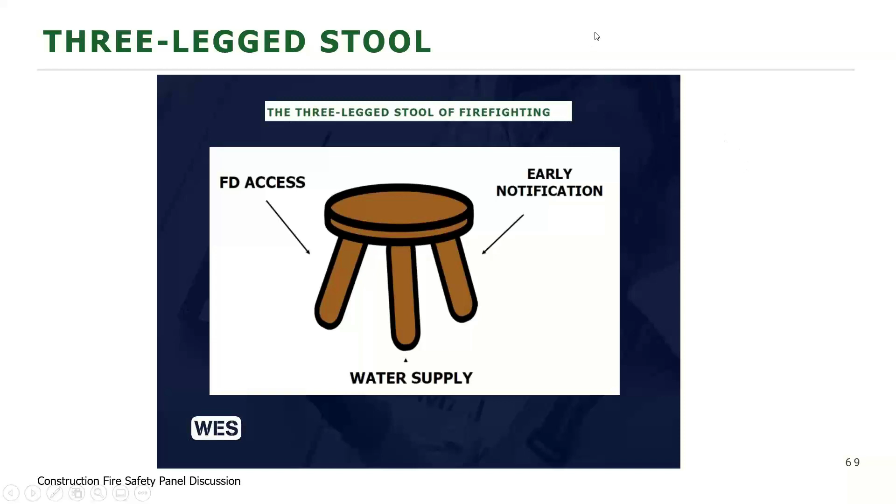You can move forward, Marcy, it's stuck. This individual is a contractor, he's a superintendent in Houston. He went back into the building with an air horn because he wanted to notify the people in the building that they had to get out. Contractors have hearing protection on when the decibel level is over 80 dBs ambient.

It's required by OSHA 1926. And this individual had to run back as part of his obligation to notify the people in the building, and you could see him. He had to jump from floor to floor, no harness or arrest system. The radiant heat was getting to him, and the rigging that was coming in, they had communication issues. The video I wanted to show you, it's very dramatic, but they finally got to him, and as they did, the curtain wall fell over.

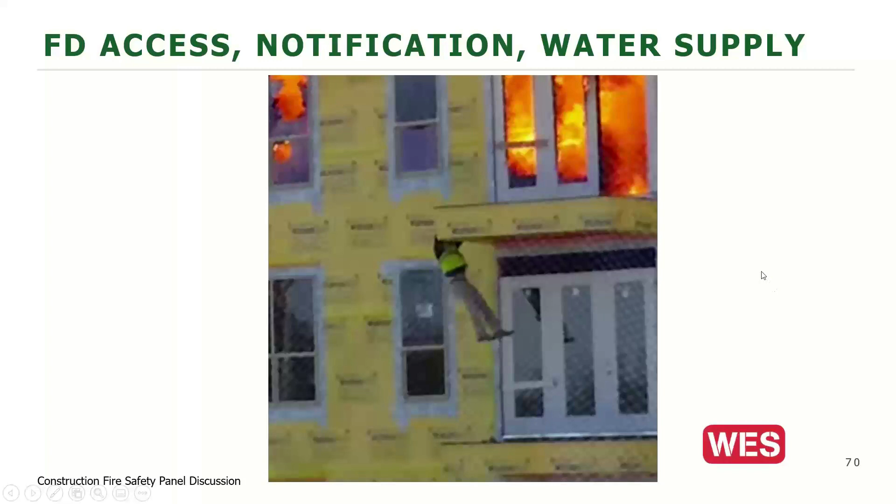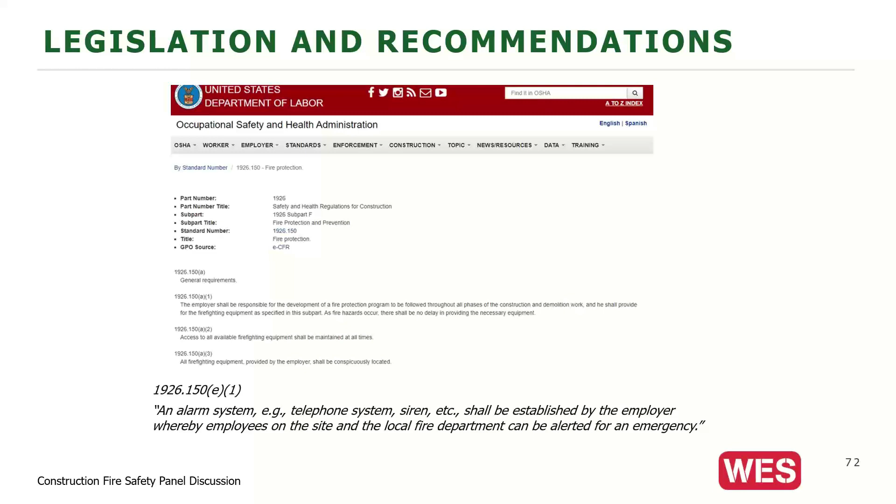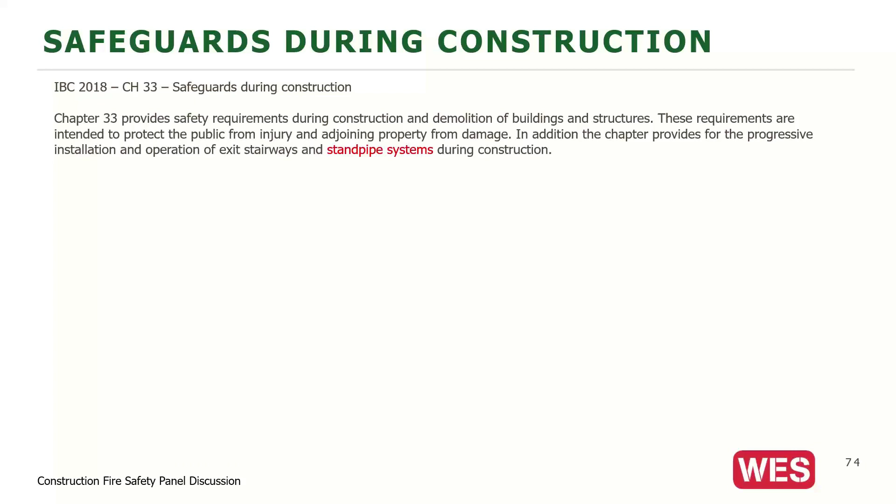And this was in the matter of minutes. So you can understand the situation's dire. We've got to get better information out there to our contractors with technology and the legislation available to them. OSHA 1926-150 demands that an alarm system be established by the employer. All the model codes, the IFC with the new revisions, 241, 1620 for incident planning, and NFPA 1. Chapter 33, we get into the standpipe requirements, which really become a piece of artwork in the middle of some of these situations.

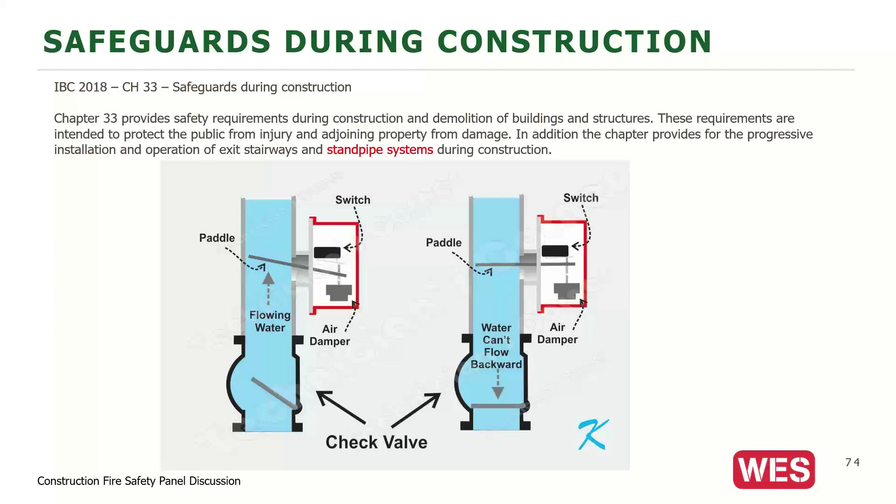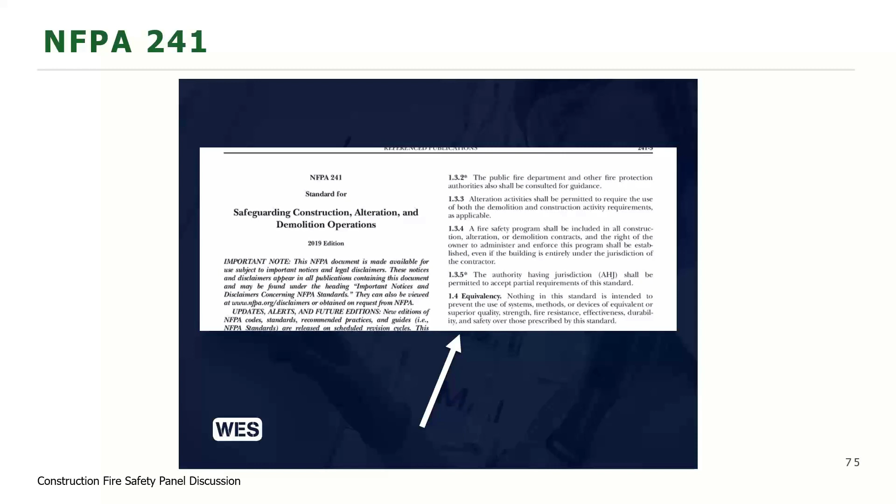But there is a possibility of doing pre-action or pre-final water deployment where you can supervise the water flow switch, similar to what you're doing with the standard fire alarm system being installed, because technology allows in the equivalency factor of NFPA 241 for the local authority to use any additional systems, methodology, or devices in equivalent or superior quality over what's prescribed in the standard.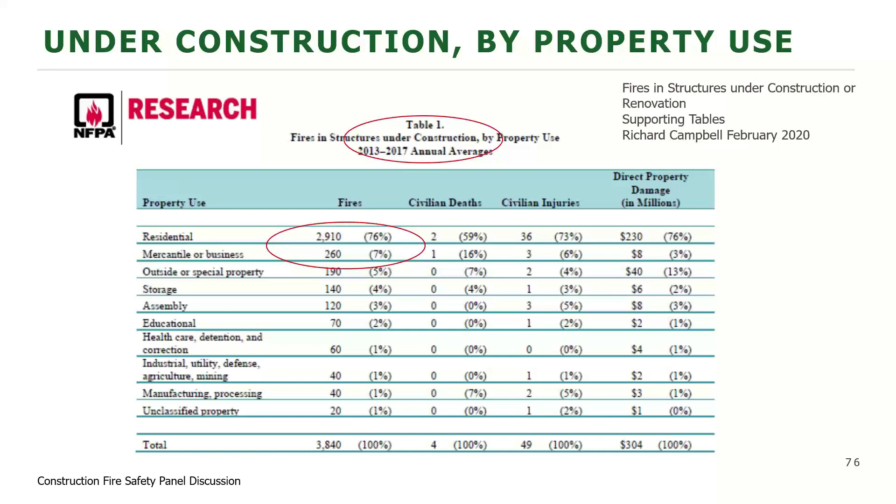And so with that, we look at where we can go into the code and the committee language that shows where these incidents are happening, and say why don't we focus on these locations and provide protection in those areas, whether it's water or electronic systems.

Ray mentioned that I wanted to introduce technology. It's absolutely something I'm working into the model code in a proposal for chapter 33, listing new definitions for temporary electronic systems, because fire watch can only be in a certain area during the prescribed times. You've got 59 minutes and 30 seconds of blind spot.

And if we talk about putting specific detection in locations, having a wired system in a building is inefficient. It needs to be maintained. The situations move and change on a job site.

Something like this can provide notification appliances like you see on the right-hand side, as well as detection capabilities for environmental sensing for smoke and heat, and then provide a wireless connection offsite to alert whether it's the fire department through a UL-listed central station or the individuals responsible for safety, such as the site safety director or the FPPM, via text message on their cell phone 24 hours a day.

And because it's spot-type detection, and this system here is wireless, battery powered for 3+ years, it can move with the hazard. So if there's combustible material storage in a location or some trailers or what have you, the wireless signal can propagate through the whole construction site, including where cell phone coverage cannot go, like some of those electrical vaults where these fires are starting, and protect the employees, notify the public faster so we get a faster response time from our responding agencies.

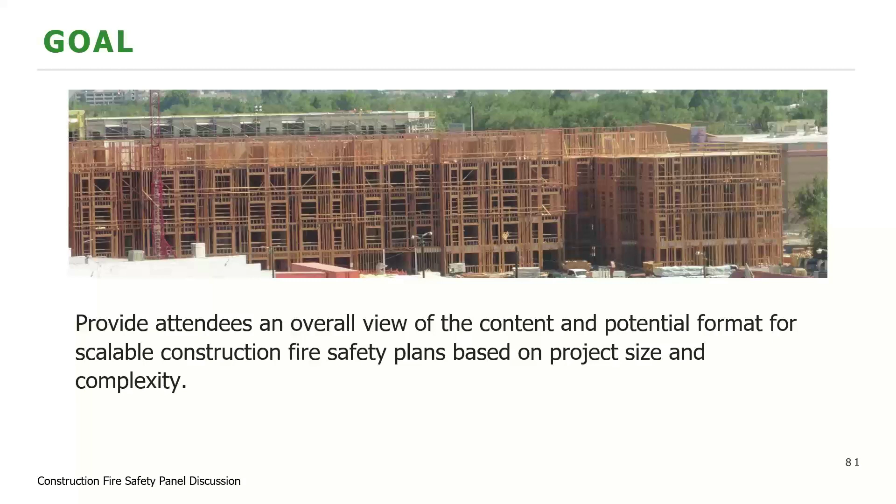It's important to point out that, as Chris and Joseph both did, this is really an owner's responsibility. The fire code is very clear that the owner has to designate a person who's responsible for developing and maintaining this plan. It needs to be somebody who is really responsible, somebody who's accountable and can take care of all the things that need to happen in the development of the plan and the execution of the plan as well.

Oftentimes this responsibility devolves back onto the general contractor. A lot of the contracts between the developer and the contractor have some generic language in them for fire safety, construction site fire safety. And certainly that's not necessarily a problem.

It's just a matter of making sure that people understand what they're supposed to do and how they have to be responsible for getting the work done. So again, this owner-designated person has to be one who can develop and maintain the plans.

I've seen some jurisdictions where they actually have a formal letter that transfers the responsibility from the owner onto that specific person who's doing the plan. So that might be something you want to consider, and I can provide you some samples if you don't have them.

So the responsible person not only has a responsibility to develop and maintain the plans, but is also responsible for training the additional responsible people on the site. Now, who does that include? Does that include the general contractor?

It includes the subcontractor. In some cases, it even includes visitors. Oftentimes during a construction project, you may have the architect come by, you may have the owner come by. All these people need to be aware of what they have to do.

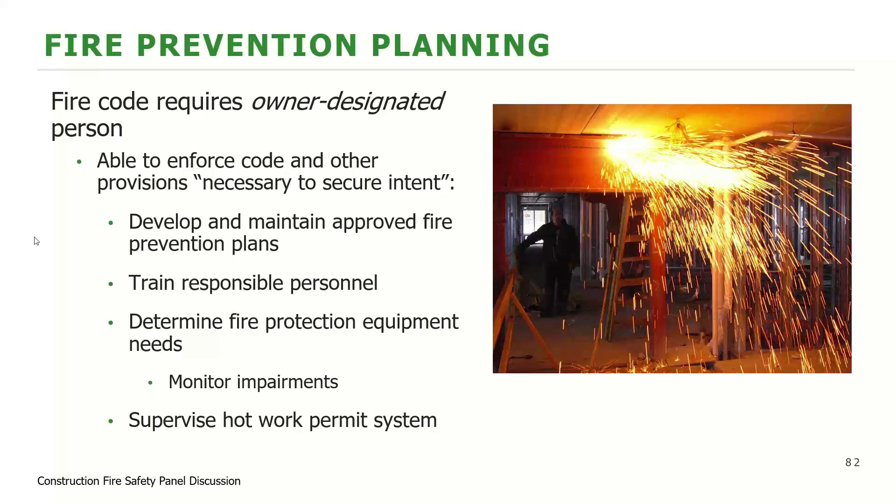So some of the characteristics of model fire prevention plans—and we're going to go through these in greater detail as we go through the presentation—we talked about the fact that they need to be scalable. And I think that's really important. People tend to be overwhelmed by this term, the plan, the paperwork, whatever it might be.

Now, on the other hand, you may have something much more sophisticated depending on the size of the project and how that happens to occur. We'll go into some of those details later on.

Of course, the plan has to be easily accessible. I mean, I could write a plan and put it in a file cabinet in the job shack, and it doesn't mean anything to anybody if it doesn't get reviewed. It also needs to be easy to understand.

Now, regrettably, it may have to be drawn in pictographs. It may have to be multilingual, depending on what the job site conditions are. So you need to identify who the users might be and make sure they're all familiar with it.

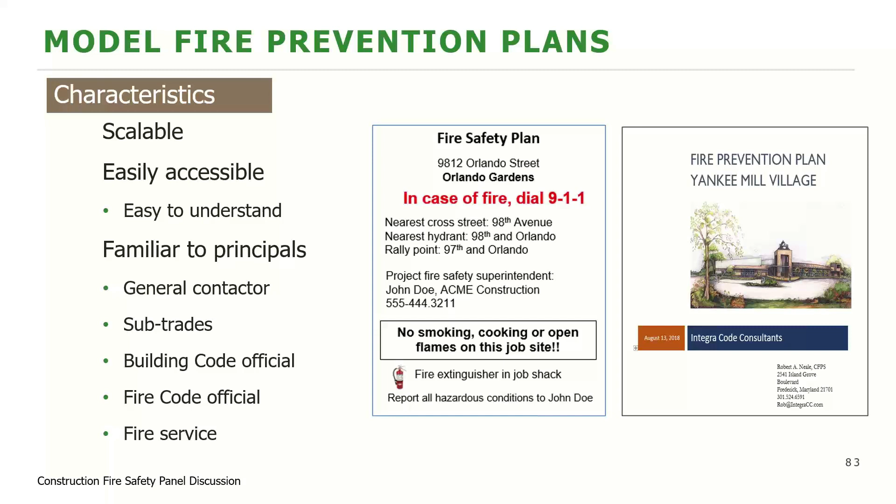Now, the first thing that really needs to happen, and this gets overlooked in a lot of the circumstances that we're dealing with when we talk about plans, is you really need to do a hazard assessment, because not every construction site has the same types and locations of hazards. I think Joseph mentioned a project in the middle of downtown compared to a project out in the middle of, I'll say, nowhere, or out in a rural area. They may have different requirements. So one has to take a look at what the individual hazards are.

That includes the type of construction, what sort of fires might occur, what sort of potential chemical or explosion hazards might occur, what water supplies are available. And I have to chuckle about that a little bit, because both Chris and Joseph talked about water supplies, but a lot of people don't realize when the fire code official is doing a set of plans, or the building code official is doing a set of plans, they often refer to Chapter 18 of NFPA 1 or Chapter 9, or I'm sorry, Appendix B and C of the International Fire Code for fire flow requirements.

Well, guess what? Those fire flow requirements that come out of the building and fire codes are based on occupied, completed buildings. Buildings that are just standing there exposed without a lick of drywall in them, without fire protection systems in them, take dramatically different water supply requirements.

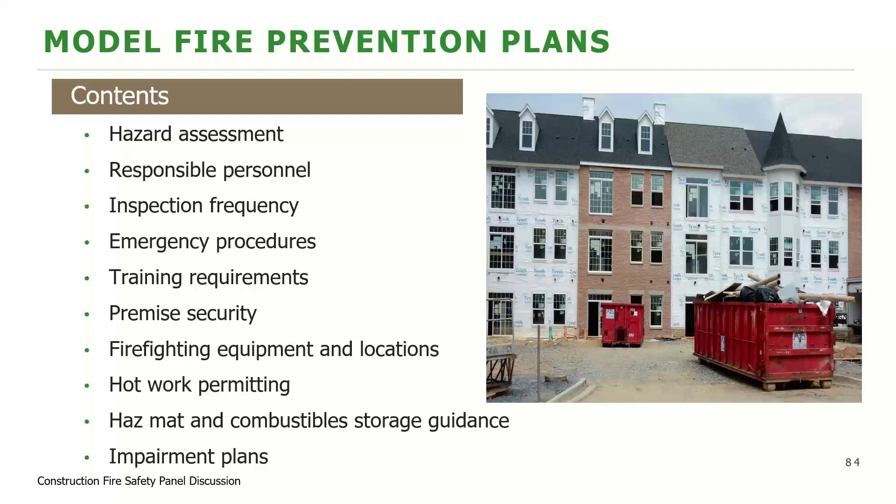So you can see that as you get a more sophisticated plan, as you get something that grows based on the sophistication of the hazard assessment, you're going to be looking at increasing the contents that go along with that.

So who are the responsible personnel? We've said this several times before - it's either the fire prevention program superintendent or the fire prevention program manager, whatever term you use under your code. It needs to be the contractors working on the job site, the subcontractors. This doesn't mean necessarily giving the report to every person who comes on site, but certainly each of the supervisors within these entities need to have access to it and be familiar with what they're looking at. Security and fire watch need to have it as well.

Employees, whether they're full-time, part-time, or day labor, they need to be aware of some of the elements that most directly affect them. Simple things like, do they know how to report an emergency? Do they know where the portable fire extinguishers are? Do they know to whom to report a hazard that they might find? All these things need to be communicated to the various people, the hundreds if not thousands of people who visit the job sites.

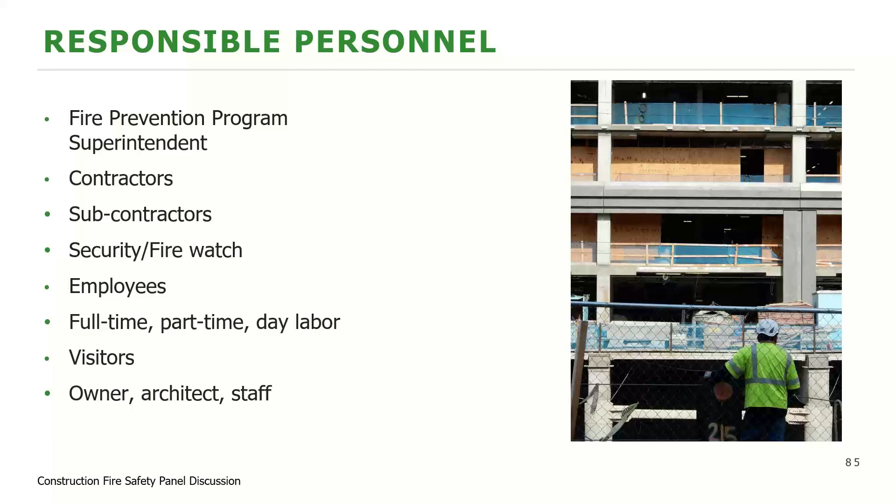Visitors, I mentioned earlier, sometimes your visitors include delivery services, whether it's construction materials, or somebody as frequent as what we used to call the roach coach, the person delivering coffee and canteen services during the day. They need to know what's going on and how to react to prevent, report, and identify fire potential problems. And then, of course, the owner, the architect, and the staff. There's a whole list of people who need to be responsible for what's going on this job site and need to have access or at least be aware that that fire prevention program plan is in place.

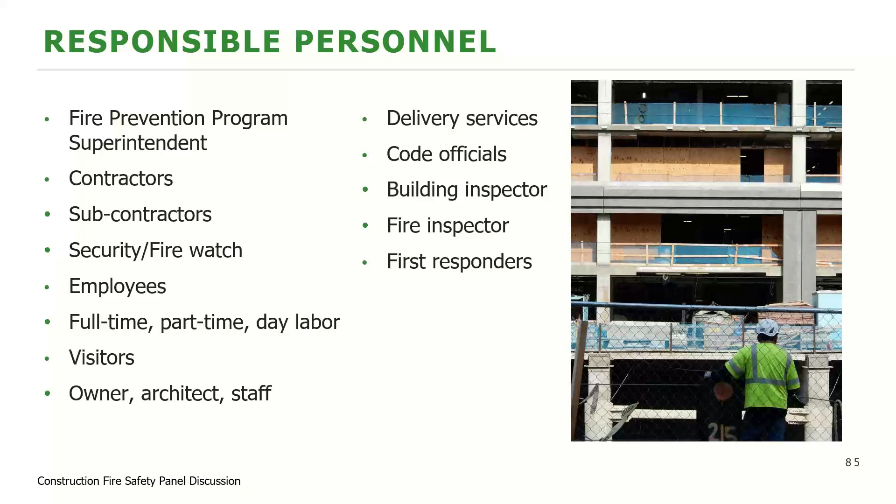So what is the frequency of inspection? Ideally, we'd be inspecting every time we were out there. Every time you walk around the job site, you'd be trained to be at least aware of what the potential hazards are, what to do to report a hazard, how to get it corrected. But the frequency really needs to be addressed based on this hazard analysis or hazard assessment.

If you're pouring concrete or you've got a concrete slab and you're doing tilt-up concrete walls, perhaps the fire hazard is not so great. But if you're doing concrete work with combustible forms, or you're starting to put up the wood frame construction, or whatever work is going on, you're going to need to have more frequent inspections with that. So those all need to be outlined on the plan, so people need to be aware of it.

You also should identify what the code official inspections are. I call on-demand inspections those being when the contractor is ready for an inspection, he or she calls the local code official, and they respond to come out and check whether something's being approved, or they have to check for an alternate method material, or they just check for the progress. That's what I call an on-demand inspection. Other inspections might be drive-bys - it might be the fire official, first responders, the contractor, or the code official. They drive by, see a hazardous condition, and have to have somebody report it.

Now, the one that's really critical, I think, in establishing the inspection frequency is the operations personnel - by that I mean the firefighters. Unfortunately, they are obviously tasked with being responsive to emergencies, and that's their primary function and role in life. They also have responsibilities for conducting fire safety inspections and for training. But they really need to be inculcated with this responsibility of stopping by construction sites on a regular basis, just to get a quick size up, a quick pre-incident plan in their own mind of what's going on. We recommend at least that happens on a weekly basis.

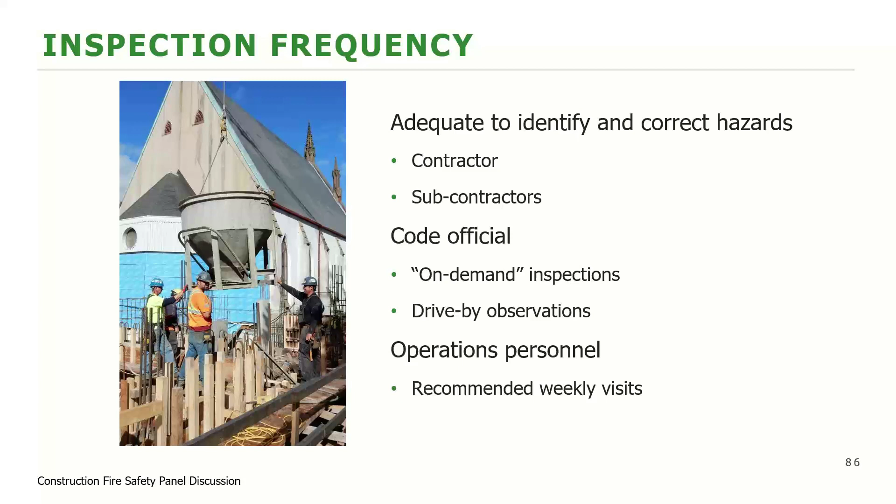The emergency reporting procedures need to be included in the plan. How do you notify not only the people on the job site if there's a problem, but how do you notify the local fire department? Typically with the international universal 911, that's the way we do it today. But there also need to be some things for the people who are on the job site, and again, this becomes more sophisticated as the project gains and grows in sophistication.

How do you notify people of an emergency? What signals do you use? What recall procedures do you use, and how do you get that communicated? How do you identify what the evacuation routes are? We typically tend to think at the micro level, well, they're going to use the two means of egress to get out of the building, but where do they go to get them off the job site, to get them out of the way of the fire department?

Do you have a rallying point identified for the workers? Do you have a parking lot nearby or an adjacent place where they can meet and gather? Do you have some sort of personnel accountability in place? If all the contractors and subcontractors are meeting at this rally point, who's going to be responsible for making sure everybody's accounted for, and who's going to be reporting if somebody's missing? Mentioned earlier, the gentleman hanging from the platform went back in to notify other people. How do they know that everybody got out?

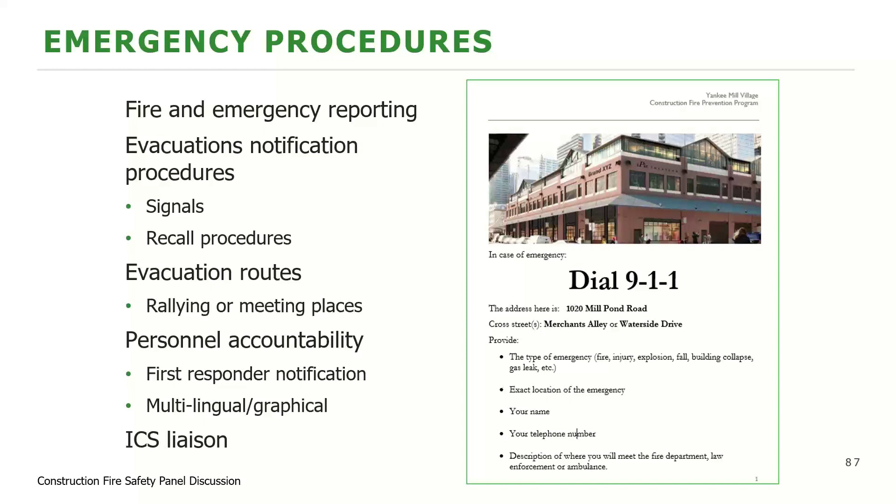Then we have this issue of training requirements that need to be documented. The documentation includes: is the fire prevention plan in compliance with what the codes and NFPA 241 require? Are you conducting the daily safety inspections? Do we know how to report emergencies? Are the inspections of the portable fire extinguishers in place? Are the employees trained in how to use them? Do they know where they are? Do they know what to do with hot work procedures? Have they been trained in their evacuation and accountability?

The fire watch duties - again, all these things that we keep cycling through, not only do we have to do, but we have to document that there's been training that goes along with that. The training documentation becomes very important in protecting owner and contractor liability. We say in the fire service that if it wasn't written down, it didn't happen. And if you can't prove either through electronic or paper records that you documented all of these factors, your liability exposure is going to increase pretty dramatically.

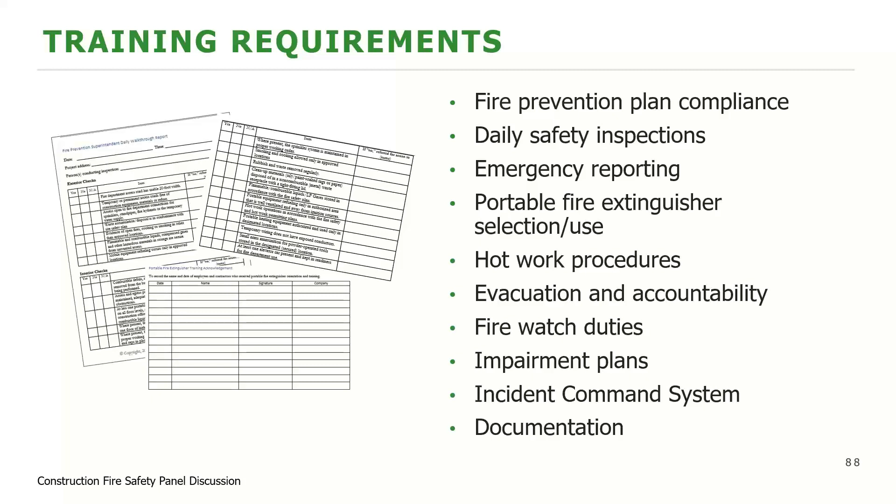I'm working on a project right now with one of these large loss fires where the contractor, who is a defendant in the suit, is scrambling trying to find records that he indeed trained all of his personnel on how to use portable fire extinguishers, because the fire was small enough when it was detected that it could have been extinguished with a fire extinguisher. But the allegation is nobody knew how to use one, they didn't know where they were, and without proof of training that's been documented, that's going to be an issue at hand during the trial.